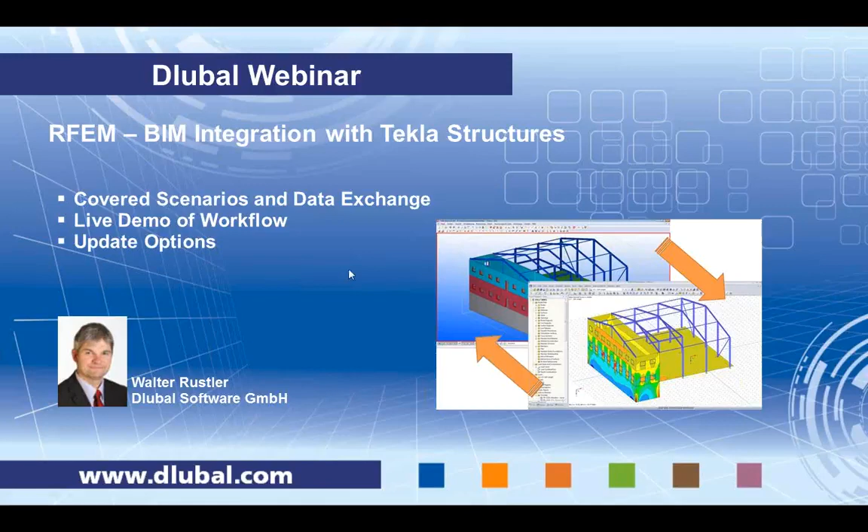So we are not limited to the generic definitions of a file-based interface, and we can pick, read and write all the properties of each object inside both applications, as long as they are supported by this API that both programs have. So in a sense, it gives us more specific options to import and export data and to directly connect the objects in both applications. It is a bidirectional interface with update options, and it works in a 32-bit and a 64-bit environment.

We can distinguish between a physical model and an analytical model, and it is important to know the difference. In general, when you work in an architectural program or a CAD application, you basically model the structure as you would build it later. When you do an analysis, you make a more simplified model that doesn't include all objects, like, for example, door frames, window frames, and other non-load carrying parts. Therefore, we have to make a difference between the physical and the analytical model.

And in general, there are some problems when you work with a physical model in a structural analysis program, because, for example, a beam might be cut off at the edge of a column, and therefore there is a gap between the center line of the column and the end of the beam. So in the analytical model, we have to overcome this gap and provide a connection, basically bring together all load-carrying parts in one structural wireframe model. And it's a mechanically correct model that includes 1D members like columns, beams, or bracings. It may include walls, slabs, or other surfaces.

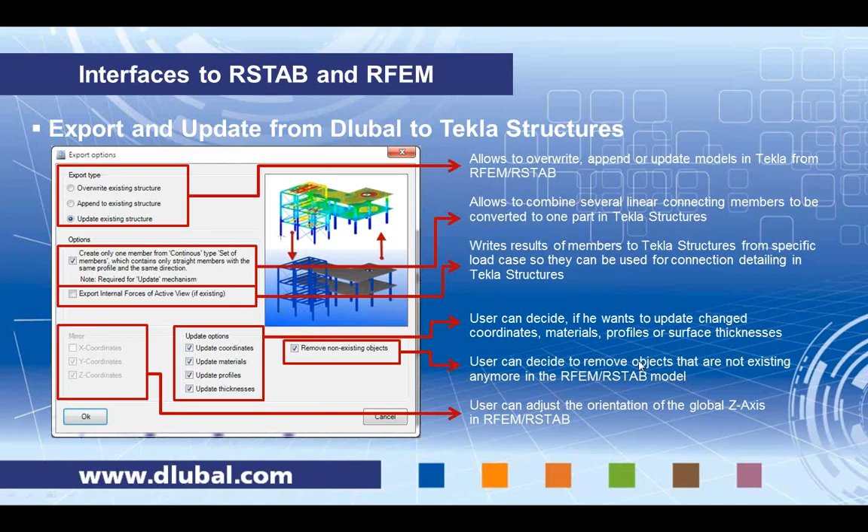Additionally, we transfer information like the node numbering of the Dlubal analytical nodes or the material or set of member numbering. So you can find the parts that you see in RFEM also in Tekla Structures. By inquiring the objects, you will find there, okay, member number 235 in Dlubal, this is what I have here now. And I can go to the Dlubal model and see, okay, where is member number 235?

All those user attributes can also be displayed on a drawing, for example. So it would be a good way to use it for an overview plan that displays the numbering of the structural objects maybe, or whatever you need it for. Anyway, we can update the Tekla model with grid lines, with information about the used materials, and also the node numbering, and additionally comments. That means I can write there, for example, this is a new beam, and then this comment will be also there as a user-defined attribute, which you can use then for filtering inside Tekla and so on.

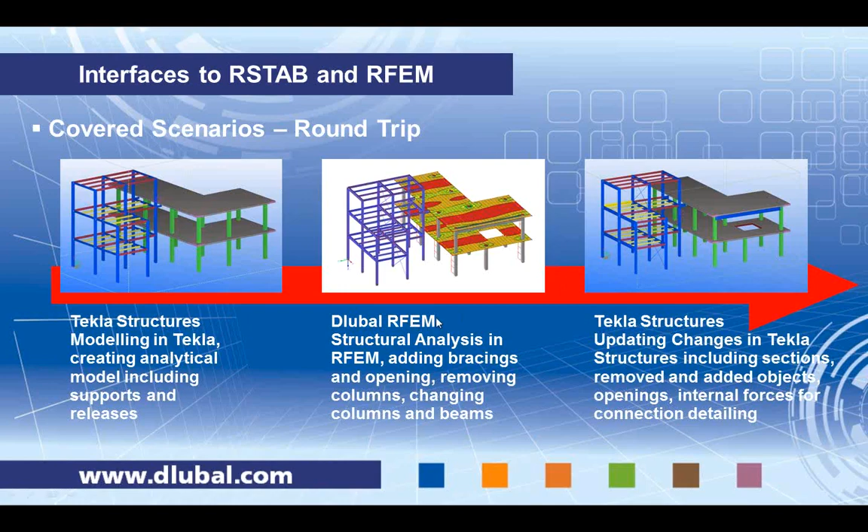Another option would be, and we will see this live in a few seconds, to start modeling inside RFEM. RFEM has great modeling capabilities as well, or you can retrieve a model from other applications, and we do the structural analysis, but there is no Tekla model. But somebody would like to have a Tekla model from what he has created inside RFEM. So we can just export it and create a Tekla Structures model from scratch.

The advantage of this is that, for example, you are a draftsman or a detailer, and you need to know which cross-section is used for which column, for which beam. Maybe if there's a simple model you understand and you can read it, but imagine there are 1,000 members and 500 different cross-sections, then it's not so easy to even know which cross-section is where. And if I'm a Tekla detailer, I might want to work inside Tekla, not so much inside the RFEM viewer. So I can use my well-known tool to get this information and to communicate it with somebody else, or to use it for detailing and modeling.

All in all, it is all about saving time, increasing quality and productivity, and this at the same time means also avoiding errors, and you have, I think, very well matching tools here with RFEM and Tekla Structures.

The next will be the live demonstration. We will do this 3D building here and import it from Tekla Structures. But before we do this major structure, I'd like to explain a little bit the options you have inside Tekla. I would like to point out that I'm not a Tekla expert, but I can show it a little bit.

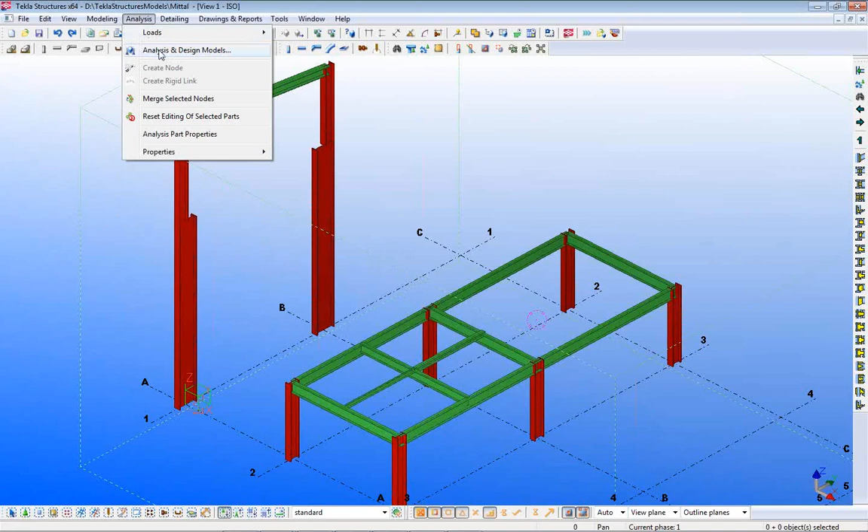We also have here a typical situation where there's a wide column and a narrow column, and then how to model this in the structural design. The special thing about Tekla is that it has an analysis and design option here. I start this, and I have prepared already a few models, and I can, for example, show when I select this model what happens here.

I get a display of the actual analytical beams, and we see here, for example, everything is modeled by the center lines of the columns. So the statical model is in the center line of the physical model, and because of this we have an offset, and this offset is closed by a rigid link, which is shown there in blue. This is done automatically by Tekla, more or less.

Then we have here the beam on top of the frame, and here the analytical line is in the center line of the top flange. It is important because you might want to have the correct column length or the maximum column length, and if I analyze it in the center of the beam, then I would lose maybe half of the depth of the beam and so on. And maybe if I have a wind load there, the wind load is not big enough. So how can I do this?

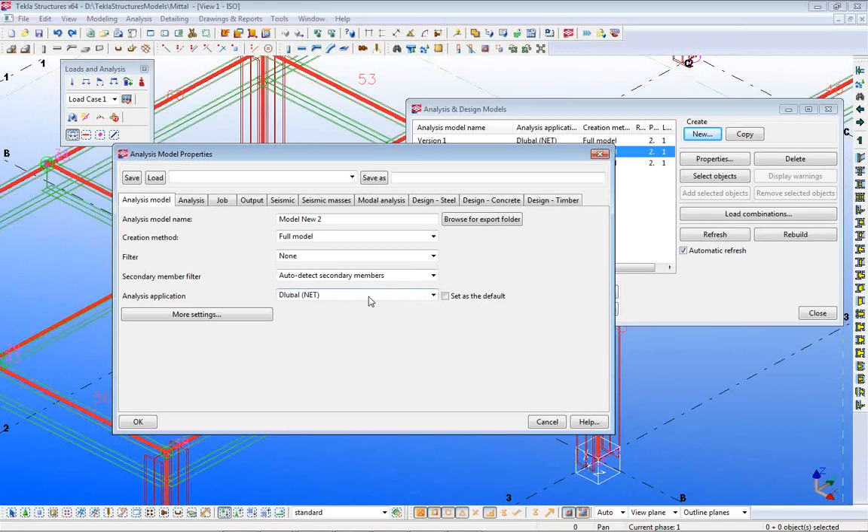Tekla is a very well-known, widely spread software that connects to different applications, and some of the tables or registers here are not used by us. We use basically what I'm showing you now. Here we have a Dlubal.net plugin, which is installed automatically when you install Dlubal after Tekla is installed. During the installation process, Dlubal looks for Tekla Structures. If it finds it, it will automatically install this plugin, and then you can select this interface. There might be other interfaces listed here in Tekla to use.

Then we have more settings, and in those settings we can set up the reference axis, member axis location, and this is an important thing. Now it's set up reference axis eccentricity by neutral axis. I can also use, for example, the neutral axis. If I do this and click OK, you see what happens. All the analytical members are moved to the center of the physical member. Because we have a different depth of the sections, the center lines do not meet in one point, and Tekla automatically creates so-called rigid links.

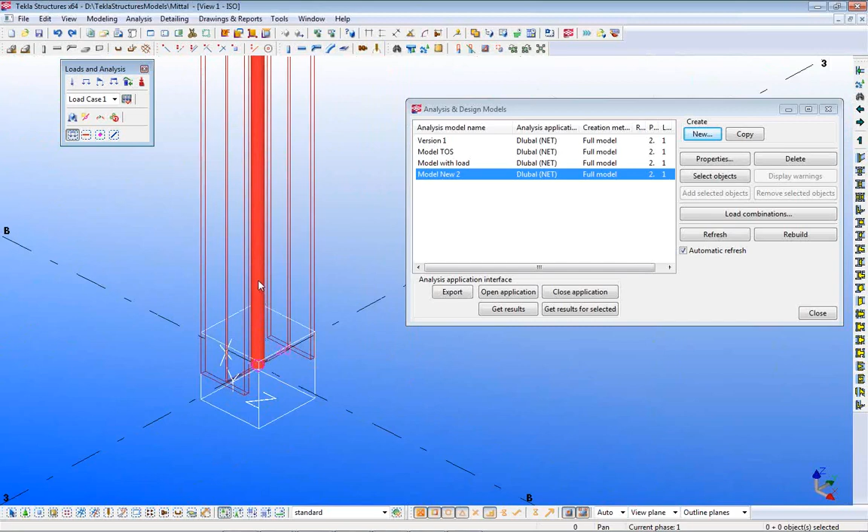Also inside Tekla we have, for example, support conditions symbolized by a white block here. If I edit the member here, okay, let me see, to edit it, it's possible typically to, maybe I have a filter which is not, yeah, I'll show this later to you. We see here that there are numbers for beams and for nodes. We see the supports. We see how the physical model changes.

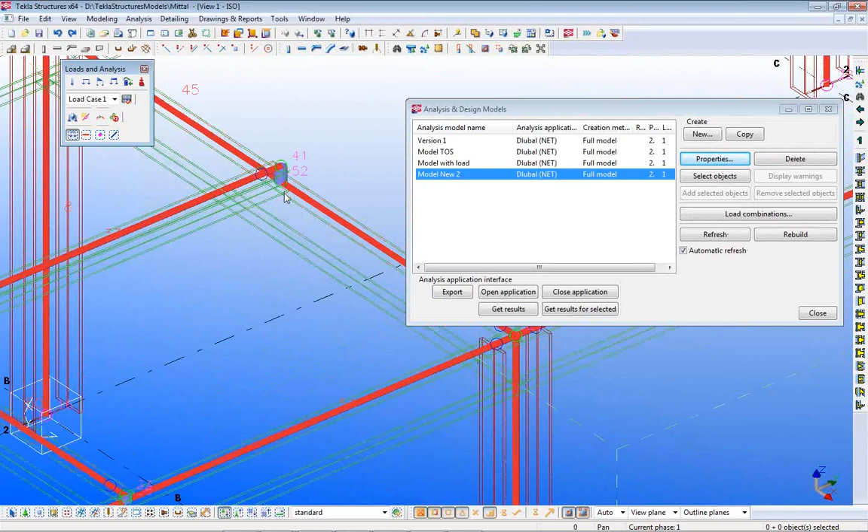If I change it again, for example, not to neutral axis but to reference axis, it is rebuilt automatically, and you see here other placement of the center lines. Okay. I didn't activate my mouse arrow here.

So let's say I want to change something here, not globally but locally. For example, I would like to say this analytical object should not be on the reference line. I can change it, and I can say position, not reference axis, but maybe neutral axis. And I modify it, and axis, reference axis, let's see what happens.

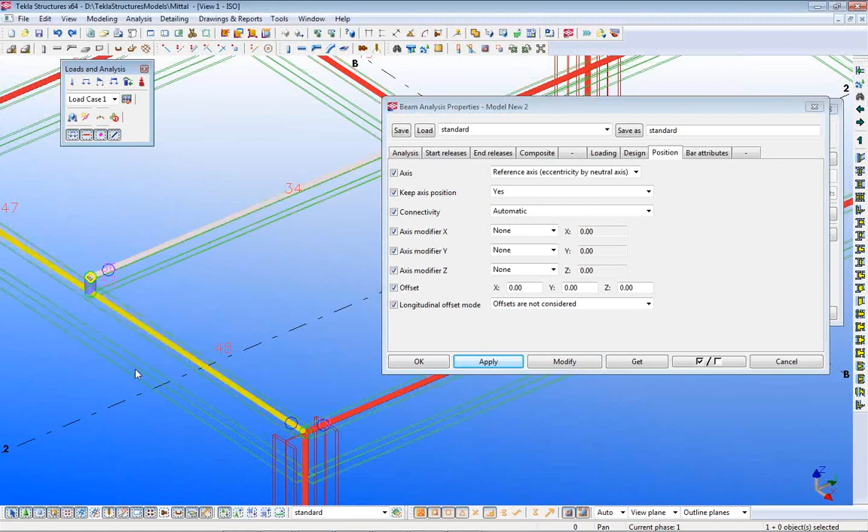I had this problem also yesterday during a demo, and then it worked, but never mind. You can do it also individually. That means you can do it globally, so all the offsets are changed, or you can do it member by member. Let's take a look at the support conditions.

If I click on the column, for example, you see here start release is a support, or it can be a pinned support, or it can be only connected, or you can have also free definitions. Then you can enter here some spring constants and so on. Or the end release is only connected. So on the top here we have no connections. Or the same thing here for the beam.

I click on it and I say start release is connected. We see here with a release, and I see here a circle. If I do not want to have the release and say I want to have it fixed, I modify it, and then it's changed. So it is possible to individually adjust this analytical model.

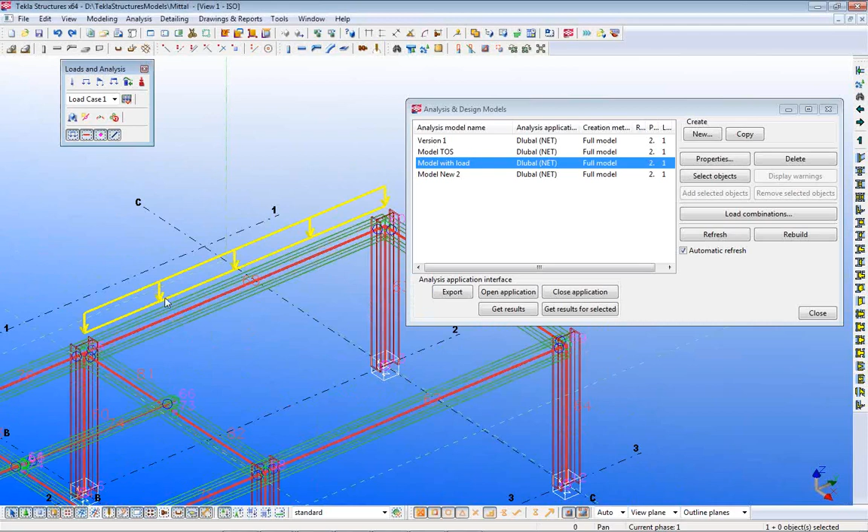I open another model here. We see, for example, there are also loads. I can display the loads basically here. You see here there's a load inside Tekla Structures where we can apply the magnitude of the load, and this is also possible to implement inside Tekla. Okay.

Maybe I try to import this model quickly into RFEM. I open RFEM here. In RFEM, I open the direct import from Tekla Structures, and I get my import option that we just saw in the slide. I want to import the analytical model. I import load cases, the rigid links we see, click on OK, and now I have a selection of the various analytical models I have inside Tekla Structures.

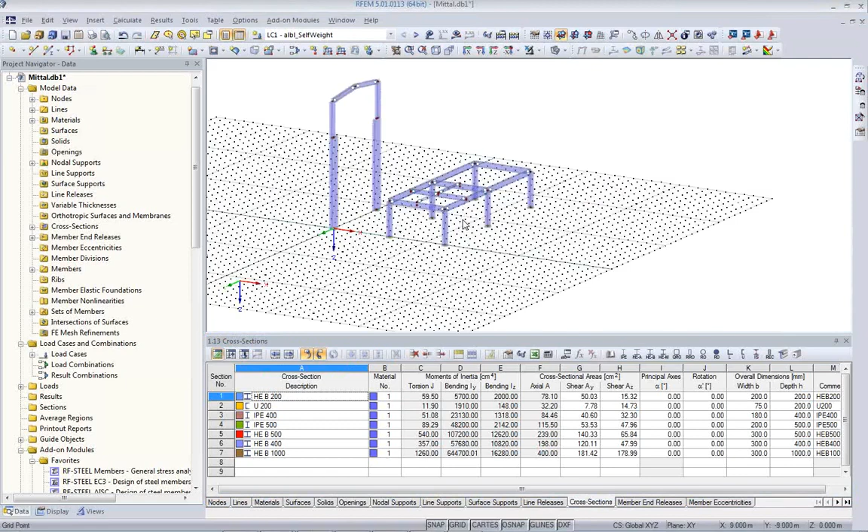So the same models that I have here are given to me as a choice inside the interface. So now I use the model with the load, which I'm just displaying here. I click OK, and there is a little bit of a protocol that goes through, and then I have here my structure inside RFEM. We also see the load is here.

And if I go to the wireframe display, we see here also we have rigid links, we have the offsets that come from the Tekla Structures model. We see here also the support conditions are here that we can use and so on, and also the columns have this offset here. So this is how you can set up your model inside Tekla Structures and change it and already prepare the structural model inside Tekla Structures.

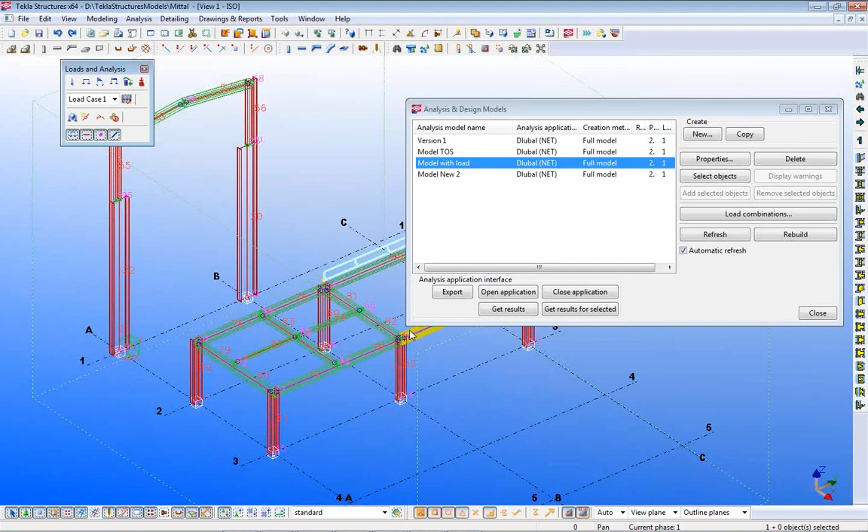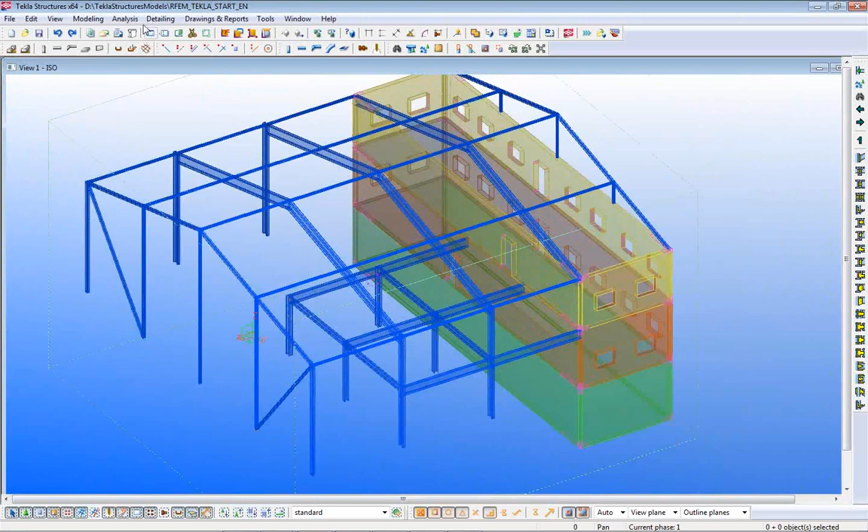Now I'll use the more complex model that I have prepared, and I open this inside Tekla Structures. This model includes not only beams but also slabs and walls, including openings, and I prepared several models inside already. You see here it's a hall including a second level here, and there is a basement including some slabs here with openings, windows, and so on. Inside this model I have prepared already the analytical design model.

Actually I've prepared several models. I have prepared, for example, the concrete part. So I only get the concrete part here. For example, I can quickly import it here. Concrete, and import here the analytical model. Okay, I don't want to load this time, and say here concrete part.

So even though I have a 3D model in Tekla Structures, I can load only part of this model, and I can say, okay, now I don't want even the 3D concrete model. I want to have maybe only one floor or one slab in the first level. So I have just one slab here that I can work with. So I can do a simplified analysis. And also the same way I can say I want to have only one end wall, and I do like a 2D analysis of this end wall here, for example.

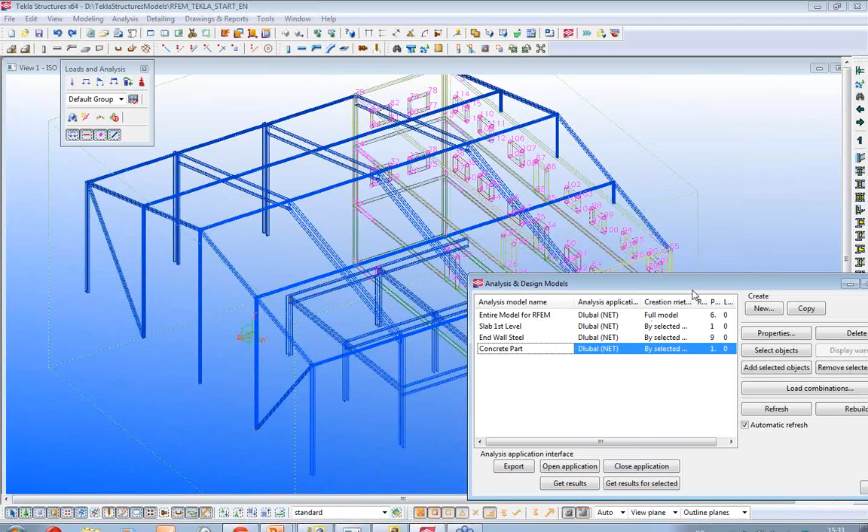If you want to, you can import only one beam if you want to. Please note, here's two analytical members. Inside Tekla we have one part. When I update it later, it will be staying one part inside Tekla. Okay, but actually I want to have the entire model. Maybe I explain a little bit about the entire model that I have done in Tekla Structures.

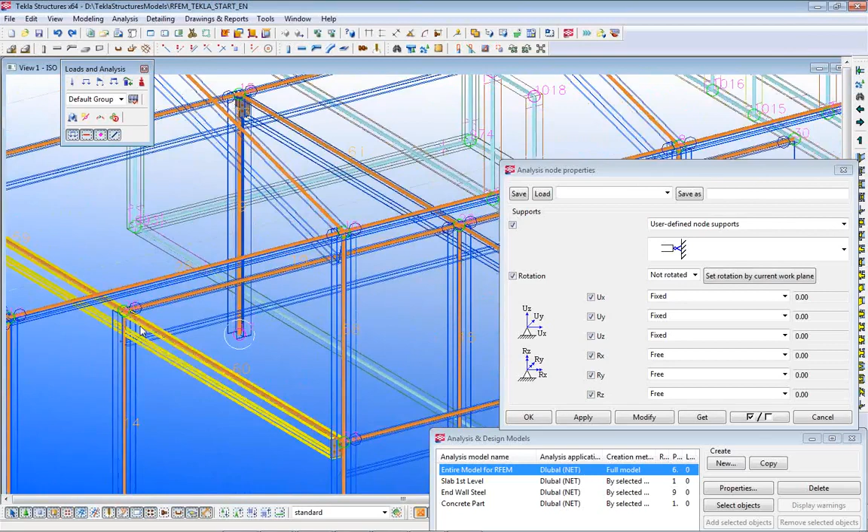Here we have support conditions, which are pin support. We have here set up releases already at the ending of some beams here. We have openings. I've made the model in such a way, for example, that those beams here are modeled as top of steel, and this analytical model lies in the center of the top flange. So it's one level. And important is when we update the sections later, that those sections, even if they change in the section, they should stay top of steel.

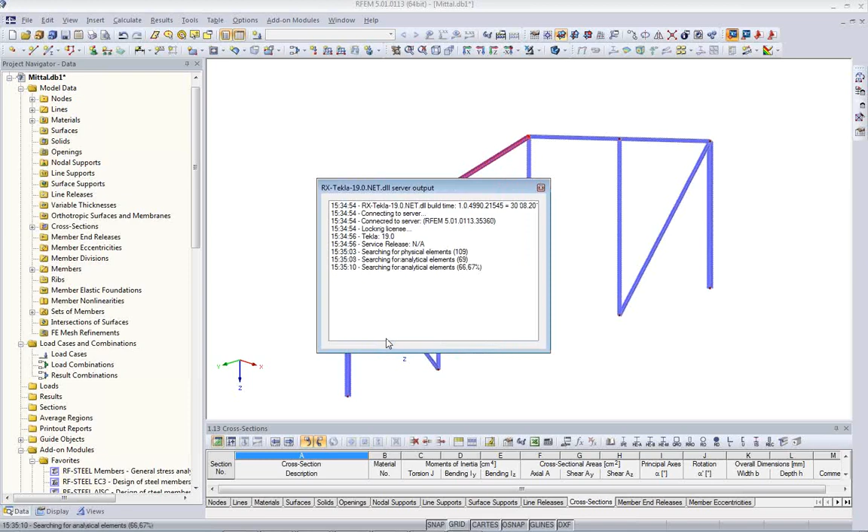Okay, also here the walls are modeled as center lines, and the slabs as well. So I'm closing the model here and stay with the physical model view, and I start inside RFEM and I import the analytical model, including rigid links, which I don't have at the moment, and I click OK. So now I choose the entire model, click OK, and we are importing the entire structure.

We see here we have the supports, we have a variety of releases here, we have the openings. We see on the display that we have already cross sections imported, and when I look at the table of cross sections, I see they are all converted from the Tekla designation, which is missing the blank between the IPE and 550, but Dlubal has a blank in there. So we internally map all these cross sections.

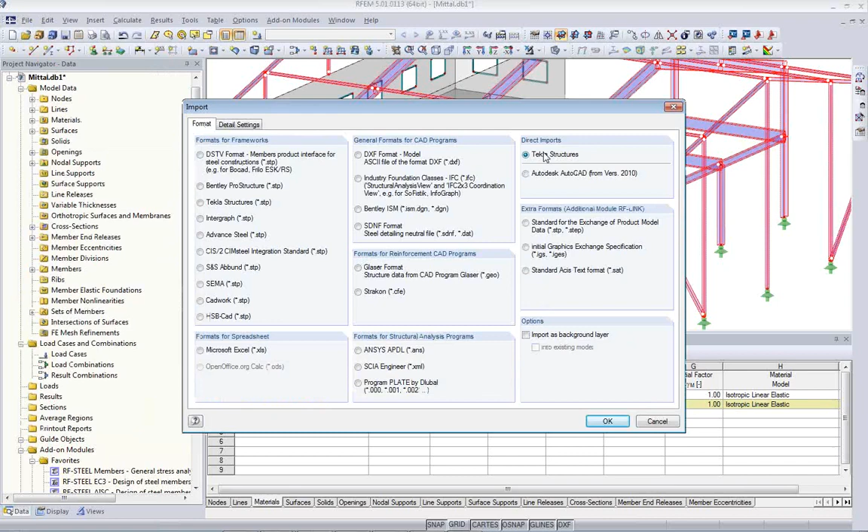Also, the materials are already set up according to Eurocode, and in Tekla the material name is much more simple. We include the code. How does this happen? When we import, we have a variety of files, of course. We use direct import from Tekla Structures, and in the detailed settings, I have the option to set up a conversion file, or I can edit this conversion file.

And here, I set up which name of the material or cross-section should be converted to which name inside Dlubal Software. So I have the option to import, export it from Excel, and I can set it up in my company as I like it for my typical materials I use. And once I have adjusted it, it will be valid all the time. The same is, for example, for cross sections.

You can use this very well if you have non-standard sections that are coming from different vendors. Everybody has his own designation, and for us it is basically impossible to know all the names that exist in the world. So therefore we match the Tekla name and the Dlubal name, and can now translate those cross sections automatically. Okay.

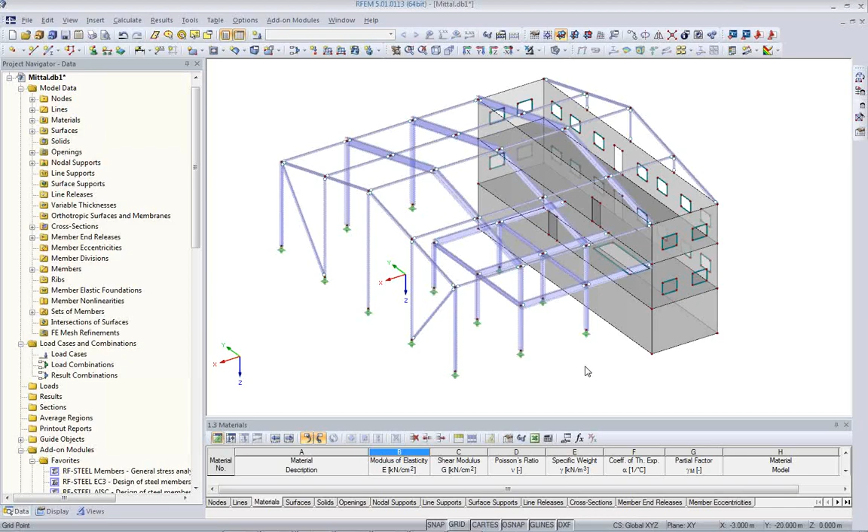Now we'll do a brief structural analysis with this model here, a 3D analysis. We'll change some cross sections, we'll add some members, we'll do some concrete design. It's basically a totally independent model from Tekla. I can do whatever I want with it. It's not some special model that can only be used in conjunction with Tekla. So it's totally independent. First of all, I would like to know if it's really working, if it's well connected and done correctly. So I do a first run and do a brief analysis.

First of all, I need a support on this foundation slab here, and I enter this support inside RFEM. I select a non-movable support as a first idea of this support condition, and edit the surface and add it there automatically. Next, I need a load case to see how the deformations are, or if it calculates and if some parts are loose. So I do this simply by creating a new load case.

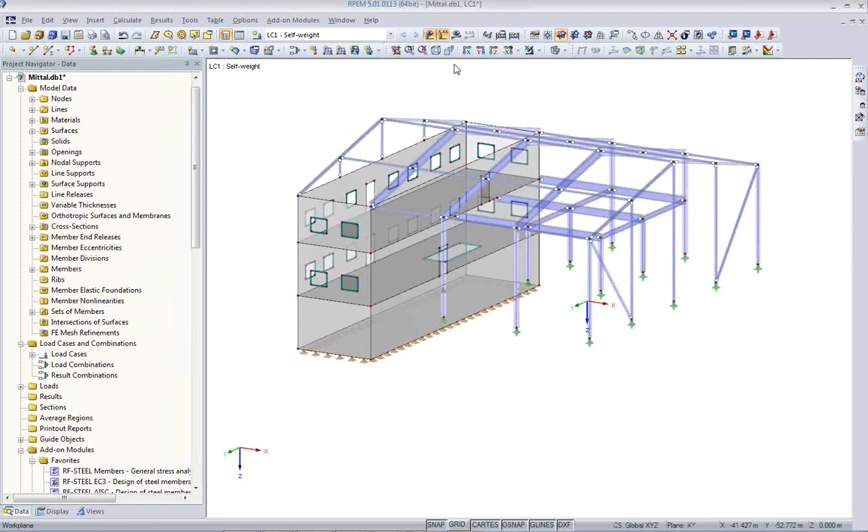It's called maybe self-weight of the structure. It will be done according to first order with a default mesh of 50 centimeters for the slabs, and we'll do an analysis. And it seems to be working. I have here now a moment diagram which looks reasonable. I have here maybe internal forces of the slabs which look pretty okay.

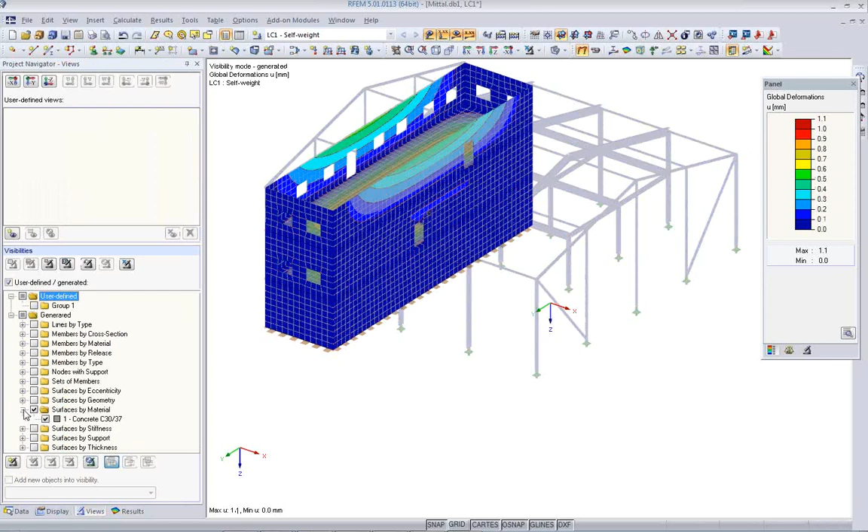I can maybe show also the deflection, maybe not now for the concrete, which is rather massive, it is almost zero, but maybe I only show the steel parts, not surfaces by material, but members by material. So we can see here all the deformation lines of the members. I can animate them, and this way I can usually find if there are some loose parts, and it looks all good.

Also, the support reactions should be more or less symmetric, which is here at the corner columns, and there's a little bit of difference because here we have this floor structure in here, but it looks quite okay. So my model is of good quality, and I can continue doing the design process.

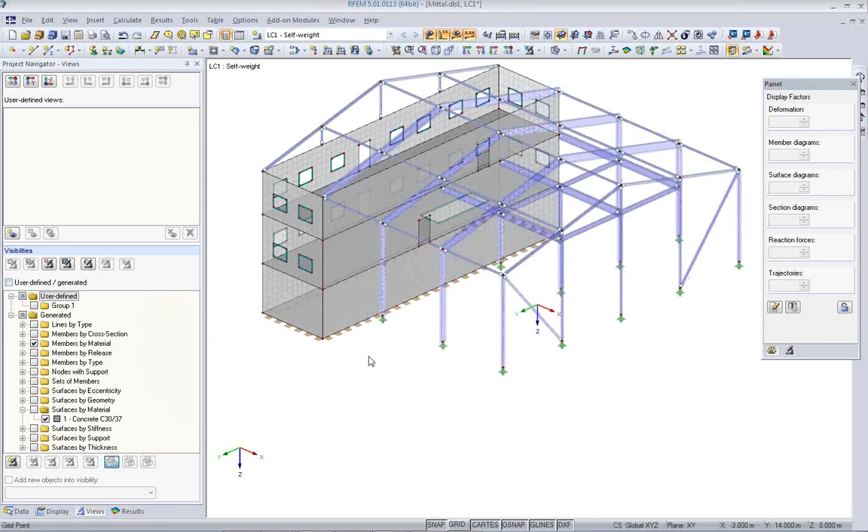First of all, maybe I check another thing from the structural point of view. I need some bracings here in the roof. Typically we have some bracings here. The first level of the grid is supported horizontally by the concrete part here, but the roof structure maybe is a little bit unstable, and I would like to have a bracing here.

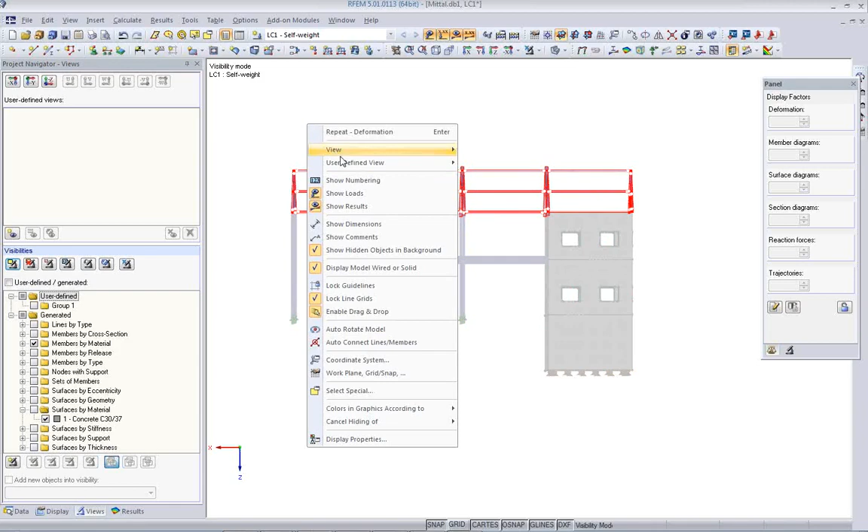Before I do this, maybe I prepare some typical views of the structure, and I select the roof, and I create a new visibility from this roof structure like this, and I say, okay, this is what I like to save, and I create a new user-defined view. I call it roof.

Next, I like to do similar things, for example, with the floor here and the additional slab. Maybe I can select it like this and say, show me only the selected parts. This is another view I'd like to save, and I call it floors.

When I go to the default RFEM view, it's displayed this way, but Tekla always uses this kind of view. If I go back to Tekla, this is their default view. So in order to avoid confusion, I'd like to save this view as well, and I name it As Tekla. From now on, if I need a different selection of my model, I click here and I have everything I want.

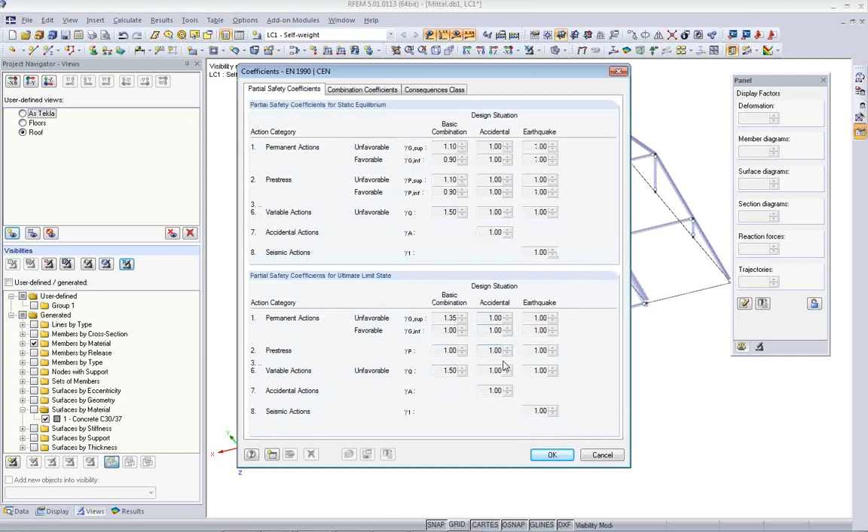Okay, let's start with the loading. When I go to the general data of the model, I can set up the load cases and combinations according to a certain code. I'll use Eurocode for this. I have here the various national annexes. Because we have international audience today, I use the general Eurocode settings, which are available at the detail settings, and we have access to partial safety factors, combination factors, and consequence classes.

Once I do this, I can also create combinations automatically. We stay with a 3D model. The advantage from now on is all the loads and load cases I enter are classified according to this code for snow, wind, and so on, and the software knows automatically which combinations to create and which combination factors to use. I can do this most comfortably in the tables, which I can display or hide, and next to the model data there is the load cases and combination data.

As you've seen, there is an automatic combination done, but as soon as I change the load case setting, and it doesn't really make sense to have combinations with just one load case, it will update or delete these combinations that were done automatically before.

I create next to the self-weight a second load case called snow, and I have access to all the action categories for Eurocode. I have wind as a next load case, and another one isn't here, so I type it in: live load. Then, because it could be anything written there, I have to make sure I choose the right category, and this should be an imposed category B for office areas. Okay, I have four load cases, which should be enough for this demo.

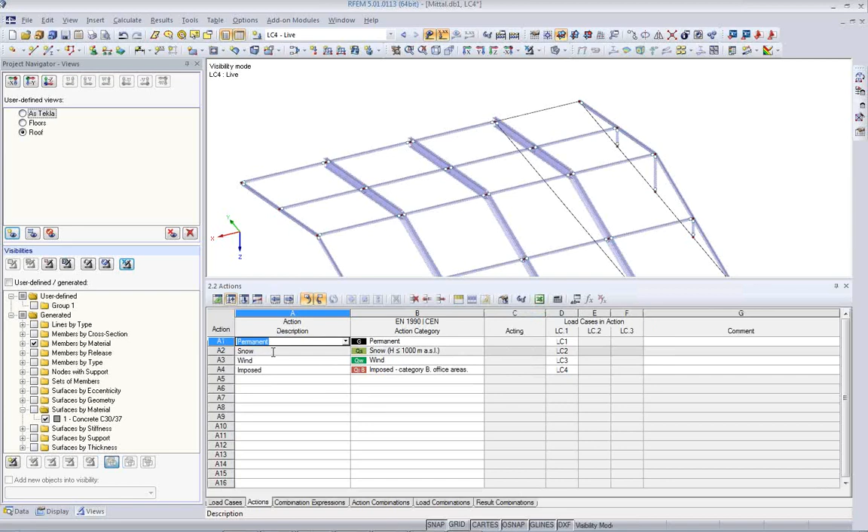I have actions, which is a first summary of all the wind load cases, all the snow load cases. They are summed up in actions, and then we combine the actions. Typically we have an ultimate limit state combination and a characteristic, frequent, or quasi-permanent combination. I want to do a preliminary design, so I'm only interested in the design ultimate limit state combination.

So you don't have to calculate everything, but you have a selection here of what you really want to calculate, so you don't turn off your brain. You control the software, not the other way around, and you also see exactly what the software is actually doing.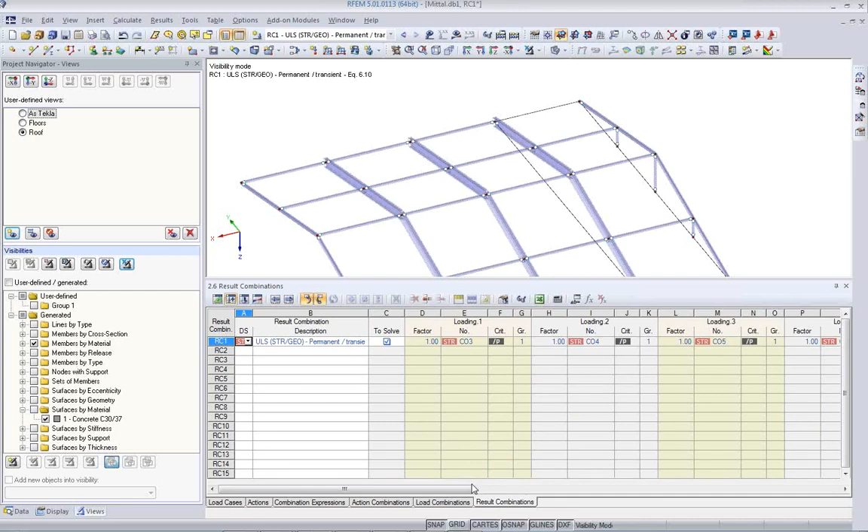Okay, then from these 13 or whatever combinations, I can create a result combination, which is the envelope of all the calculated combinations before. So I get a max-min summary of all the combinations I have to analyze. Okay, this is the combination part.

Now we talk about the actual loads. Self-weight is already here as the self-weight of the structure, but I need to add the actual loads now. So I go to the wireframe view and add a roof load quickly. It's a surface load assigned to load case 1, and the magnitude in this case is 0.5 kilonewton per square meter, in global direction but related to the true area.

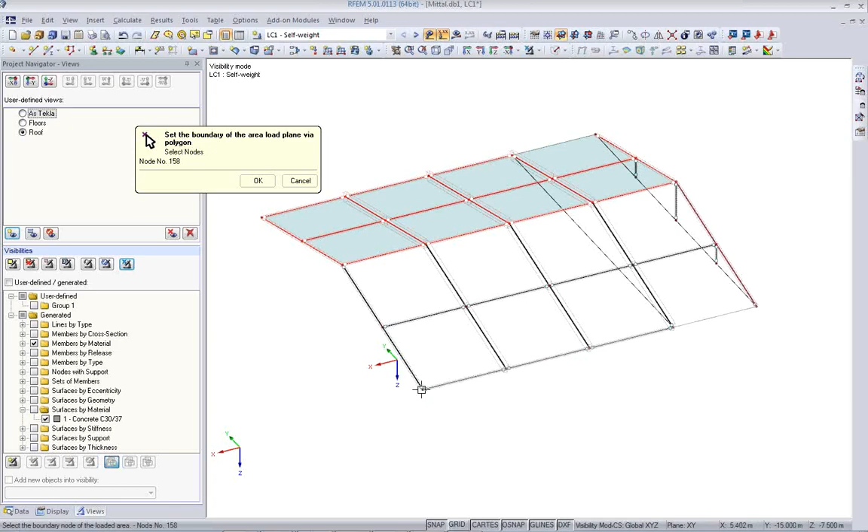So I pick my boundary nodes of the surface, and I can continue doing this for multiple surfaces. On OK, I return to the dialog, and I can select parallel members that should not be loaded, so only the red members will now be loaded. I click OK and OK again, and I get a summary and some statistics, and I see here my first area load.

The next load, our self-weight load, will also have to be on the floors. That's why I prepared this view. I create another area load on the grid here and select the individual corner nodes, and decide that the distribution of the loading should be on the cross beams. And two more surface loads on the slabs, 0.5 here and here.

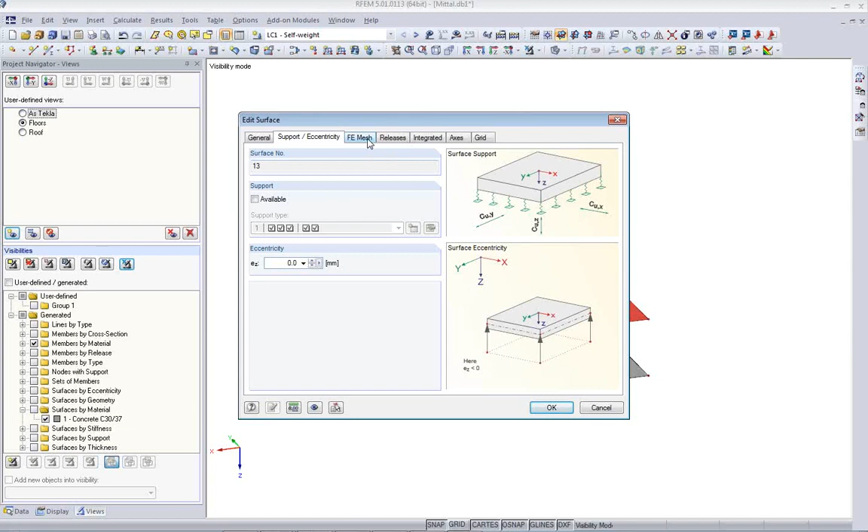While working with the slabs, I remember I forgot something. Those slabs are now rigidly joined with the walls, but I don't want this. So I double-click the surface, go to releases, and add a linear release that sets off all the spring constants for moments on all the edge lines of the surface. Then I get displayed a linear release on the edge of the surface.

I do the same thing with this second surface, create a new release, also the same type, so there should be no moments at the edge in the wall. Here, because it does this automatically on the opening, I have no wall, so it doesn't make sense to have the release there. I can just select it and delete it.

Now I think I have everything regarding the model. We've looked at the self-weight load cases, and we continue with snow.

Snow is something for the roof, so let's quickly have the roof here. I have a tool called snow load on duopitch roof, and I can use the Eurocode here with national annexes. The ground snow load should be 1 kilonewton per square meter. And I pick now the boundary of this duopitch roof.

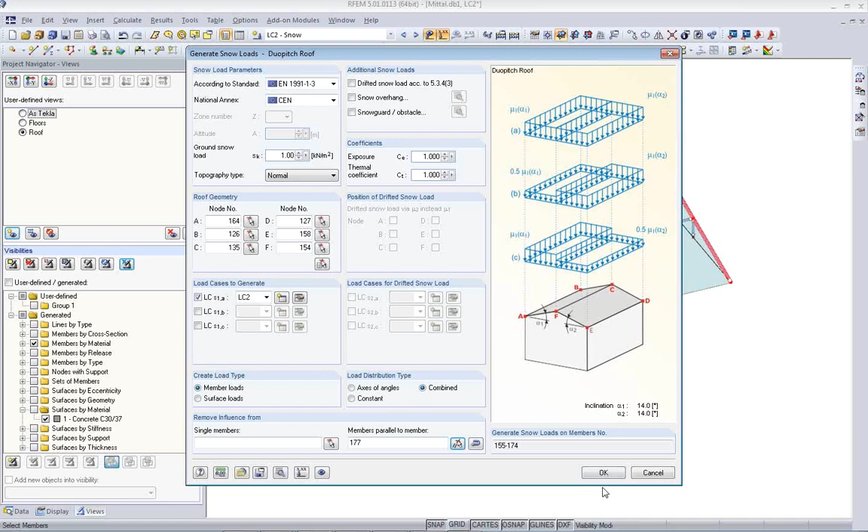There are 6 nodes I have to pick. It should go in load case 2, which is snow. It automatically filters it and remembers it. Then I say again, only on the main beams I want to have this loading. I get a summary and my final snow load applied.

Next is the wind load. Wind is on the entire structure. I go to wind here, and I would like to have some wind in the -y direction. So I add a wind load as force in global y direction, -0.5, on this surface and on this surface.

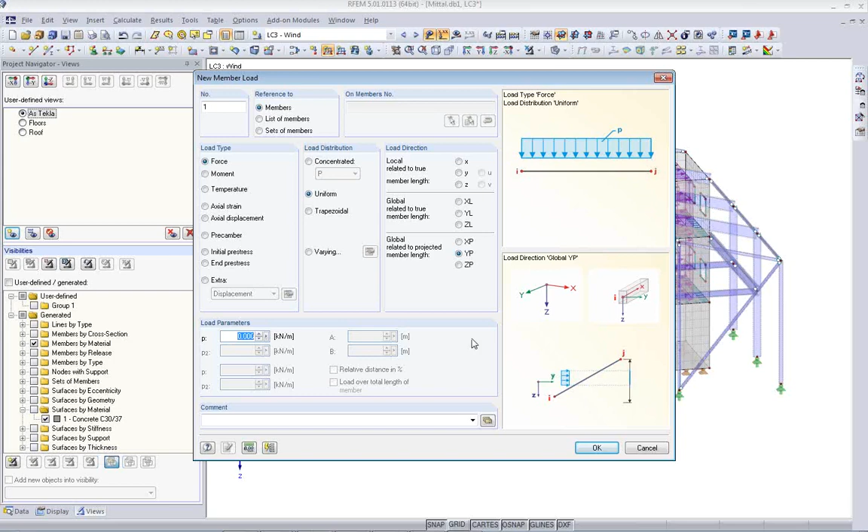On the opposite side, I have a little bit less. I create here again a smaller surface load. I also need some loads for the columns, member loads in the global y direction. It should actually, in the projection, if it's not vertical, be -2.4 as a member length, as the member load.

On the edge, there should be some lower value, maybe only half. Then here, on the opposite side, again the same thing, but -1.5, a little bit less for the center columns, and -0.75 for the edge columns.

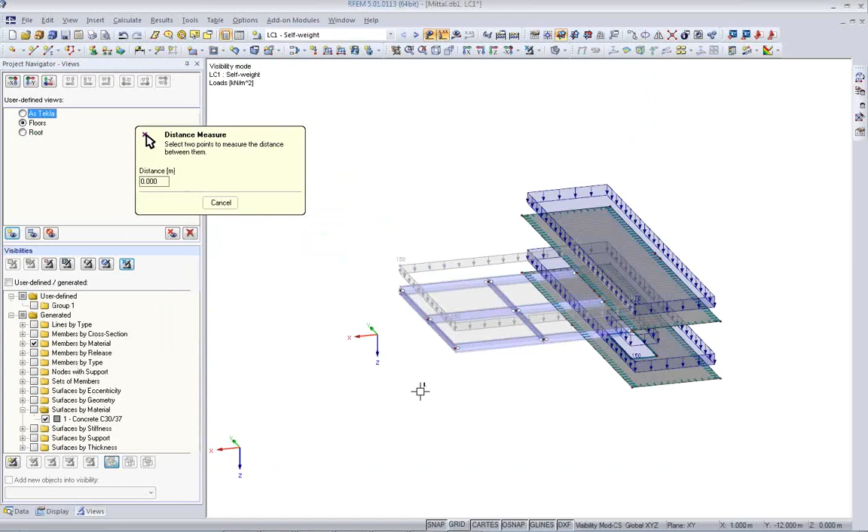Additionally, I have a wind load on the roof, and I use the generate wind load on duopitch roof function. Again, according to Eurocode, I need the height of the structure, which I can grab from the structure, and I need to select the roof points.

One more wind load. Okay, I have the height. Everything is fine. Now it's important to understand where the wind blows on the structure, and you see here A, B, C, D, and I use this order to select my nodes as well.

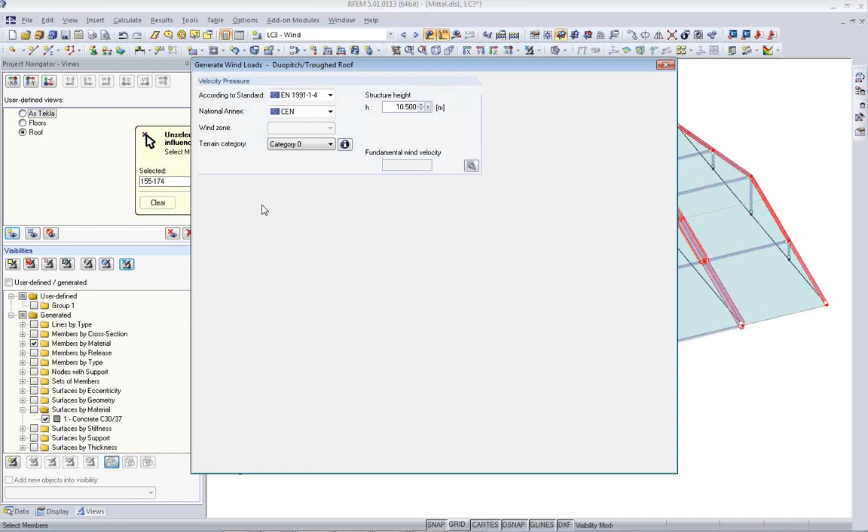The wind load should be analyzed going to load case number 3, and I only want it on the main beams as well. You can see in the background also the impact categories or areas, G, F, H, J, I, as in the code. And it creates my uplifting wind load.

Last but not least, we have a live load on the floors, which is basically simple. We can create another surface area. It remembers the last input, so I only need to add the actual live load. It's updated here in load case 4, and the same live load, 3.5 as global, in the direction on the slabs.

It is more or less complete now. Of course, I understand that wind loading can be much more complex. We may need some load mode working off the end walls here and so on. That's extra work that needs to be done.

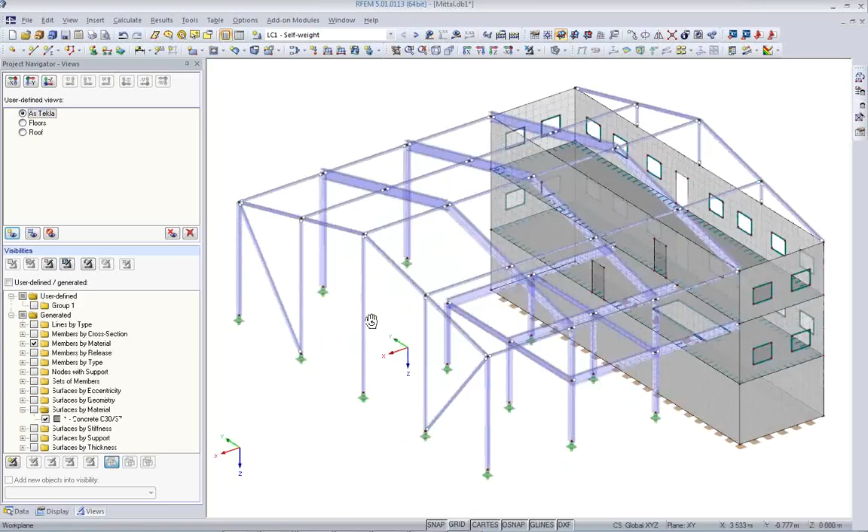We have for typical structures wind load generators as we've seen for the roof, but for our demonstration here it should be enough, and we will now run the analysis of this structure.

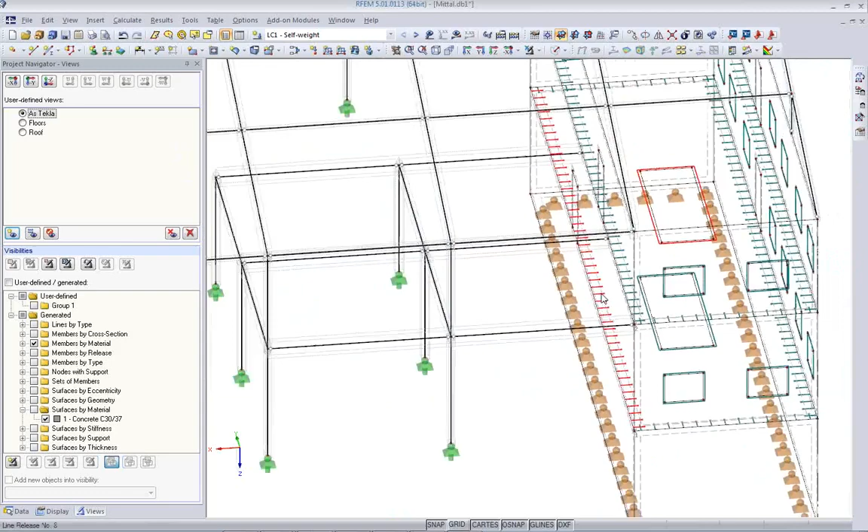Before running the analysis, I remember one more thing. I got a call from the architect, and he says he wants the same opening that's on the first floor also on the second floor, because otherwise there's no way to get up there. So I need to quickly copy this opening: I select it, move-copy it, make one copy, and copy it from here to here. Now there's an opening also on the second level.

Now we run the analysis, or go to the design. Design is done by the additional module Steel EC3. I'll briefly go through this module - there are other webinars that already cover it, as well as another seminar covering the concrete module, which I'll show in a few seconds. I won't explain all the details now, because we also want to exchange data with Tekla.

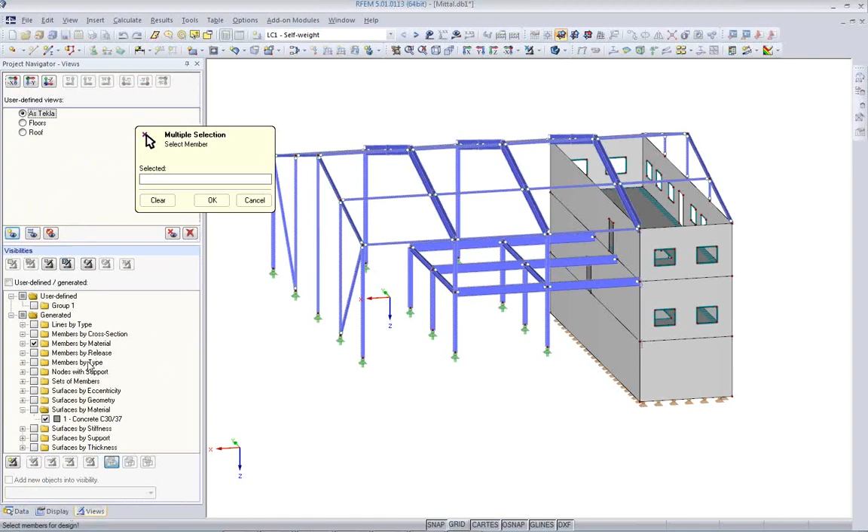Now we go to the RF-Steel EC3 module to optimize some of those sections. We have Eurocode design, with national annexes, and I select a series of members I'd like to design. Here I'll use the Filter tool again to select, for example, members by material, so I hide all the concrete stuff which has nothing to do with EC3.

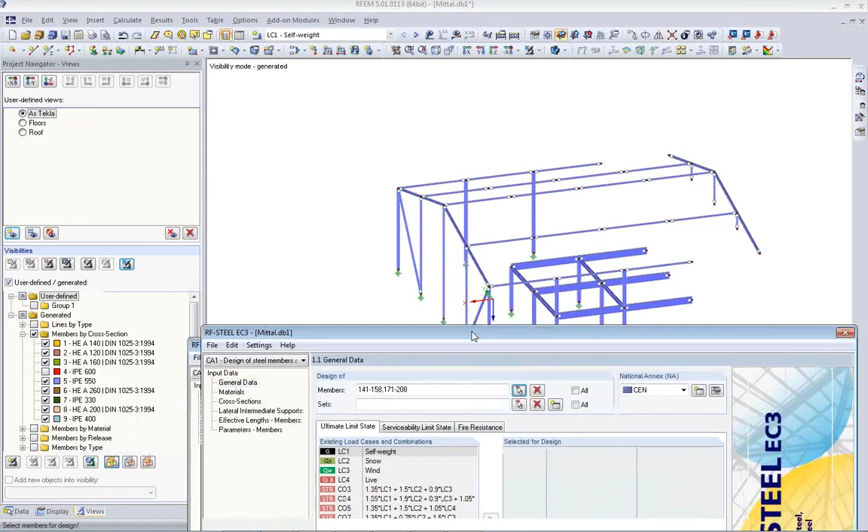I can also do similar things like members by cross-section. If I open this filter, I can say please do not show certain members - I don't want to see those. The reason is those main girders I will design with a different procedure, but the rest will be done as members, since all those members have design lengths equal to member lengths, with the exception maybe of the columns, but we'll neglect that in this case.

I select for design the ultimate limit state combination I pointed out before, and now I'll also select the set of members - I select those main beams here, which are 6 main girders. The design length of these main girders is the entire length from the wall to the pitch of the roof.

It has a local support which is held by the frame, which I forgot to enter - I see it's supported by the bracing, which I forgot to enter, in the center. So the buckling length in the weak direction of the cross section is smaller.

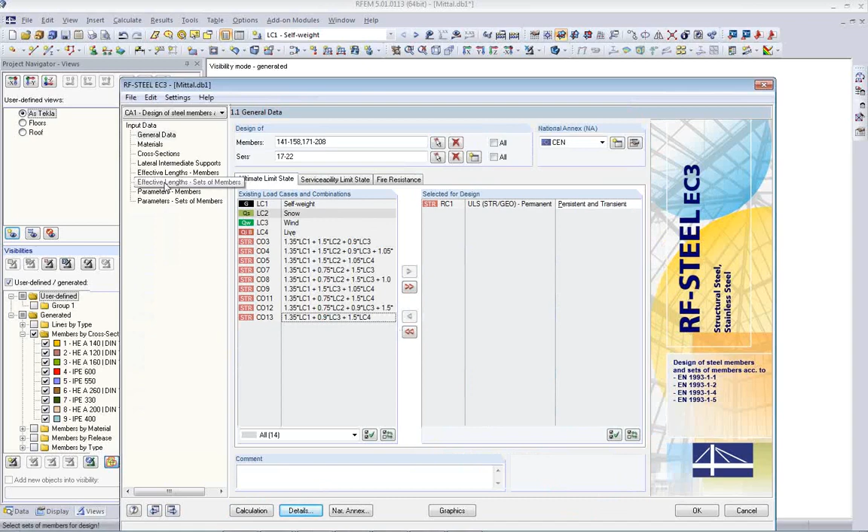I can select now in the stability design that I want to use the equivalent member method, or I could use the general method, but the equivalent member method is simpler in this case and is the more general option typically used, which is why I selected it here. We have the materials, and the cross sections imported from the structure.

We have lateral intermediate supports for members, and effective member lengths, including effective member lengths for set of members. Here I select the factor 0.5, so about the local axis z, which you can see here, the buckling length will be only half of the actual member length.

With the use of set of members, I can handle this very comfortably. Otherwise, I have the option to take into account rotational restraints from a steel deck, for example, or shear action from a steel panel, which of course increases the stability of those beams.

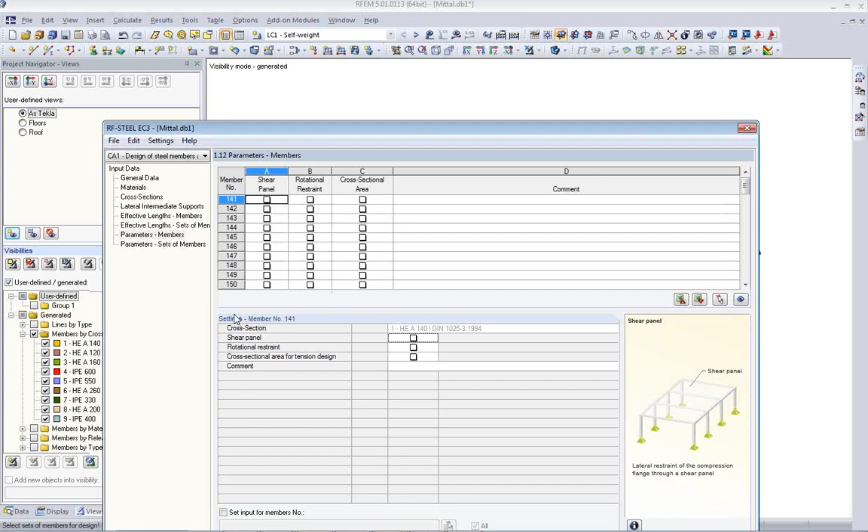Before I run the analysis, I go back to enter the bracing which I forgot. Let's go back to the roof. I have a tool that quickly allows me to add bracings - tension only members. I create a new cross section, which I can just enter here.

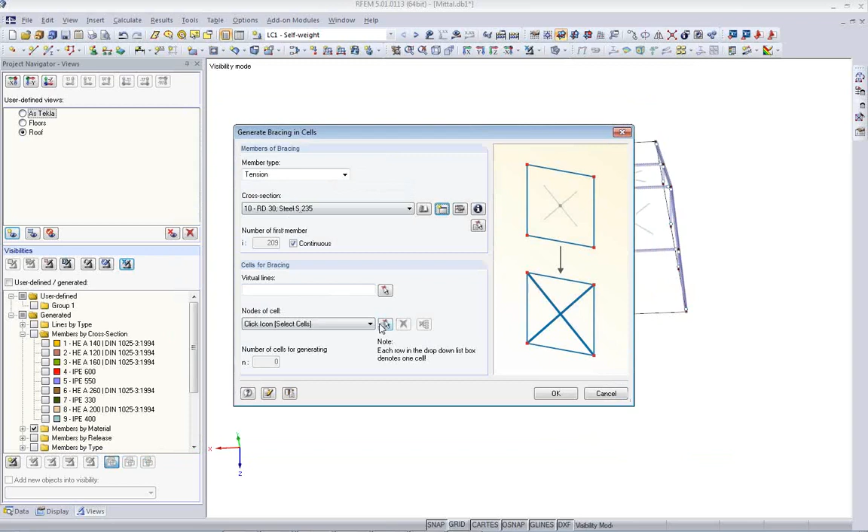I select steel as the material. You can either go to the library to pick it, or enter it manually - if you know the name, it will automatically read it from the library. It's tension only members, and now I can just select the bracing crosses here, which the software finds automatically as enclosed cells and gives me a symbol I can select. Otherwise I'd have to manually enter all those beams, which is more complicated. Quickly I've created my bracing here.

Here we go, we have the entire model now. Maybe we should talk about concrete as well - let's design that too right away. Concrete surfaces.

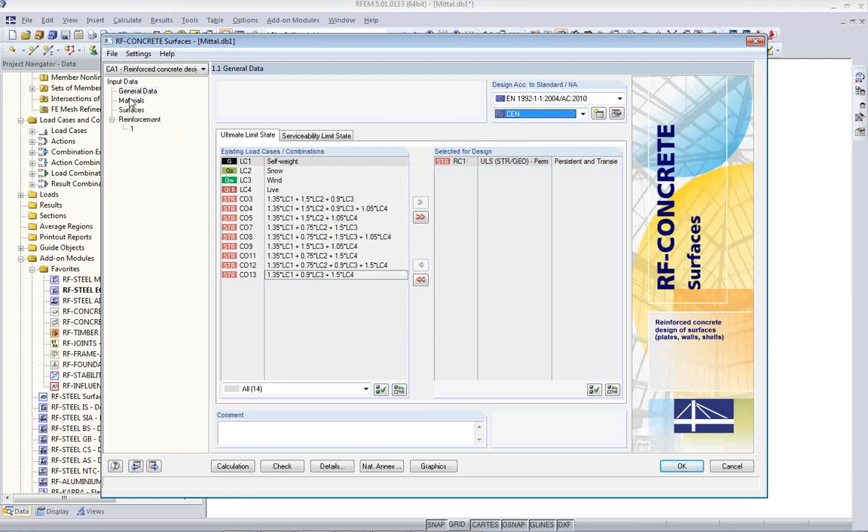We go to the surface module, and we also want to design the result combination 1 according to Eurocode with the national annexes for the general settings. I have the materials as well here, the surfaces, and the reinforcement settings. I don't want to investigate all surfaces. I only want to have my 2 slabs.

Okay, and here I need to talk about the concrete cover. I want to do it according to standard. I just select the exposure class. Now let's stay with XC1, and I get automatically the required concrete cover. I can do a provided reinforcement that I decide to enter there anyway, on top and bottom to avoid cracks.

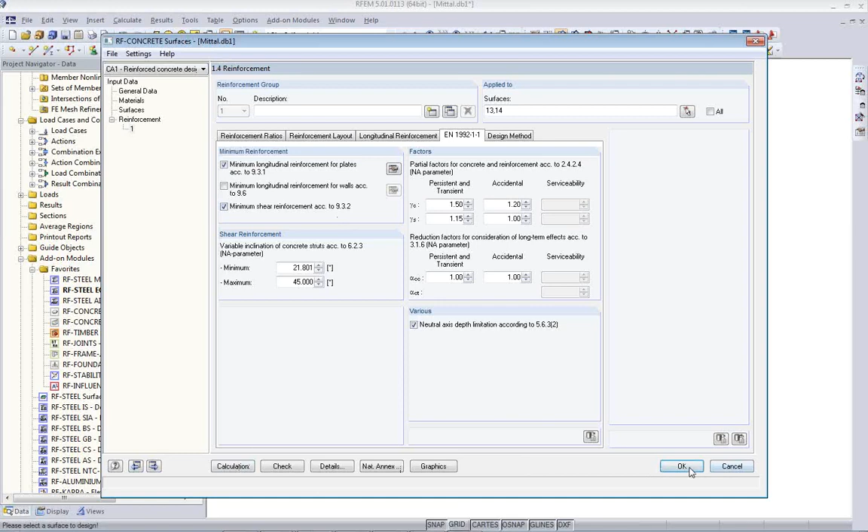There's also an option to analyze the crack width and so on, but for my preliminary design, I say I want to have this wire fabric here, and I like to check the minimum longitudinal reinforcement and so on. So this is it for my settings, and I think now I can just calculate everything. Calculate all.

Now RFEM will calculate all the existing load cases that I have selected for calculation, and I hope everything is going well. I haven't checked it with the real loads, only with the self-weight loads, and it will take now a little bit. It's a nonlinear analysis. I can set up that combinations are done linear or nonlinear. Typically it's linear for load cases and nonlinear second order or P-delta for combinations.

We use now a nonlinear analysis, which is taking into account the additional moments from deformations. So equilibrium on deformed structure is maybe the important sentence to say here. Okay, after a little bit we will get hopefully the results. Combination 12, and I think we have 13 all in all. So there are several iterations because we have failing members like the bracings, and also we have the second order iterations anyway. Okay, now we go to the concrete and the steel design, and we get finally some results.

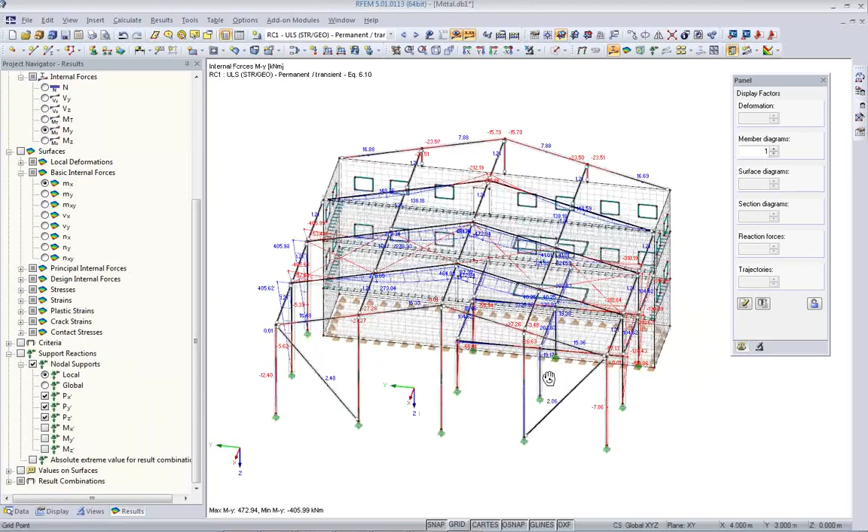Okay, let's take a look at the results maybe for the internal forces. Result combination 1. I go to the wireframe display and wire display, and we see here bending moments, for example. From ultimate limit state combination, we can set up here axial forces, bending moments, strong axis, weak axis.

Looking at the weak axis bending moment, I see here, I don't like to have that. Maybe there's something wrong with my orientation. Yes, I have a frame here, it's a moment connection here, and it goes into the weak axis of this column, which is not good for design. So probably I have to change this. I remember this and do this then later.

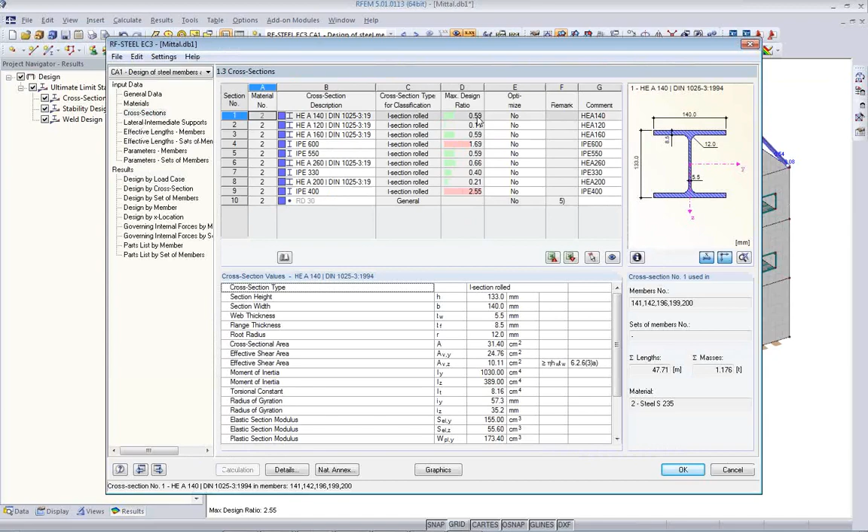Let's see what we get on stresses. Steel EC3, ultimate limit state, design ratio is 2.55. Let's see which cross sections are a problem. I go to the cross section table and see here, okay, there's a problem, not a problem here, not a problem here. These seem to be okay, but these main girders are a problem. Then we have the cross beams here, which are pretty okay.

And I'm missing actually, now here they are. These are the main columns here, which are not so good. We have IPE 400 here and it's no good. So something needs to be done. Probably it would be a good idea to have here an additional column and also maybe to support these main girders here. Some design considerations that maybe are done while the structural engineer is doing his job.

Also, maybe I'd like to optimize those cross sections, and I optimize them from current row. This means I optimize, I don't change the type of section. I use an IPE, for example, and I stick with an IPE here. And this I want to change anyway, so I leave it. Those main girders maybe can be smaller, so please pick another one.

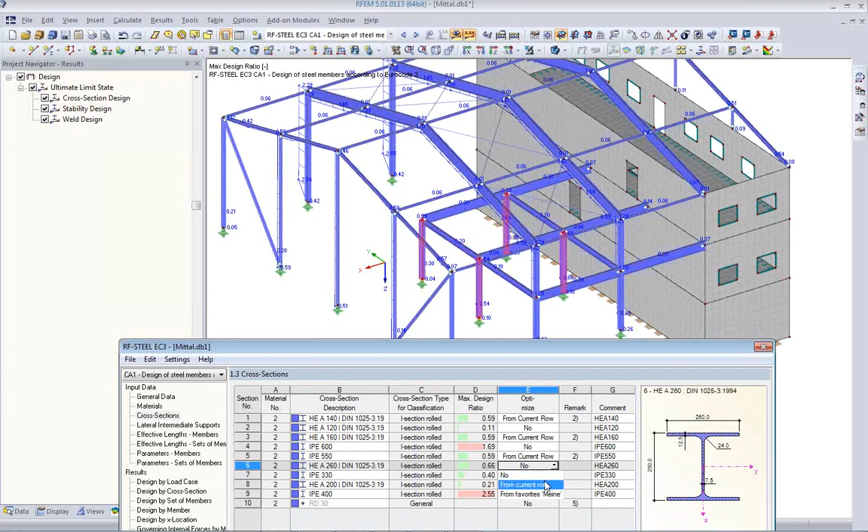Then we have here the columns here, which I need to change, but anyway, I'd like to set them up for optimization. I also want to optimize those. And my main columns I want to optimize as well.

I run the analysis, maybe now only in the steel check. So I rerun the analysis here, calculation, and see what I end up with, with the internal forces that I have now.

So it picks a HEA 120 for the corner, 140 here, which sounds reasonable. 500 is okay. We have 240. Okay, let's stick with it. 240 instead of 330 here, and this is 600, so there's nothing to be done.

But now the blue cross sections are optimized, and I can export them now to RFEM to update my internal forces. I do this now because I have a better idea already from these cross sections. Okay, 6 are updated now from the initial design, and now I'm doing my model changes additionally.

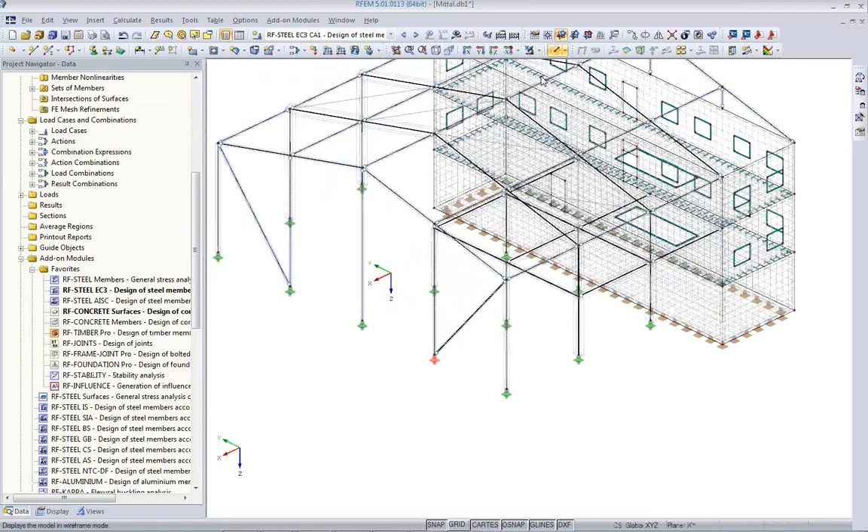That means I want to have a column here. I pick the type of column from an existing beam, so I have the orientation and the cross section correctly. Say okay, from here to here, and the same thing from here to here. Also, I'd like to have this little column here of the same type. I copy it, make one copy from here to here. Okay. So everything seems to be reasonable.

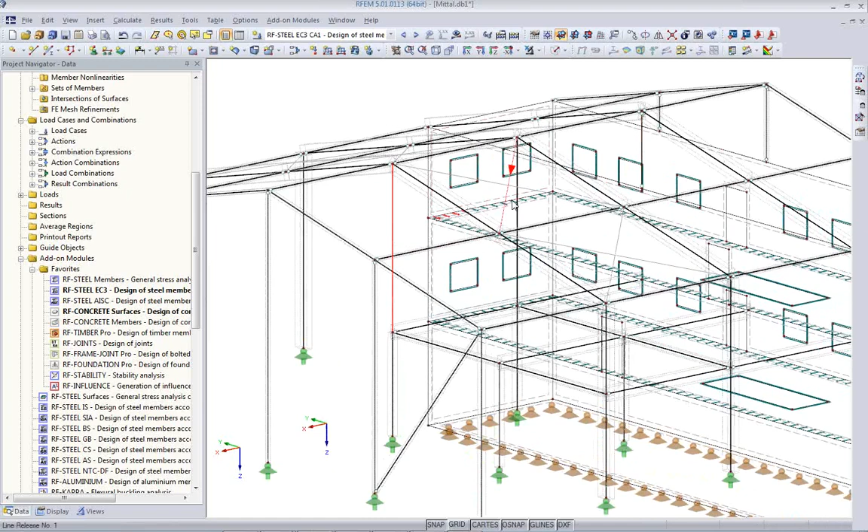Now here on the top, I want to have an additional member release, so I have an easy connection up here. At the other end, I cannot forget to rotate my columns here by 90 degrees, so they are carrying the moment in the right direction. Voila. With this, I go back and run my analysis of Steel EC3. I just click, please show me results of Steel EC3, and RFEM will automatically update the results.

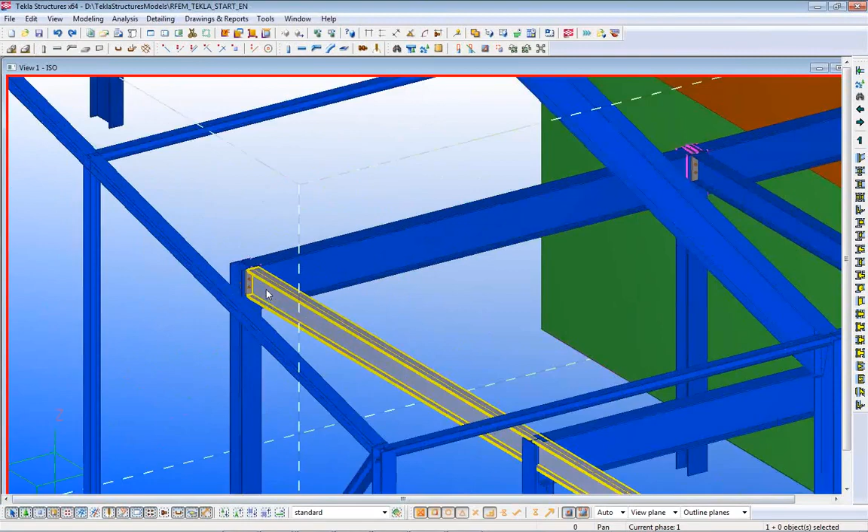So this takes another few seconds, which allows me to explain something more in the Tekla model. In the Tekla model, I also have connections already. So the connections may be done now while the structural engineer works on the design. And the connections are here. It's a very powerful feature of Tekla Structures.

You see here connections are there. We see here also that these parts are one part, one beam. This is one beam. These columns are one part. So it is a different model. The analytical model is a different model than the structural model. Let's see what RFEM does. So we have a nonlinear analysis here.

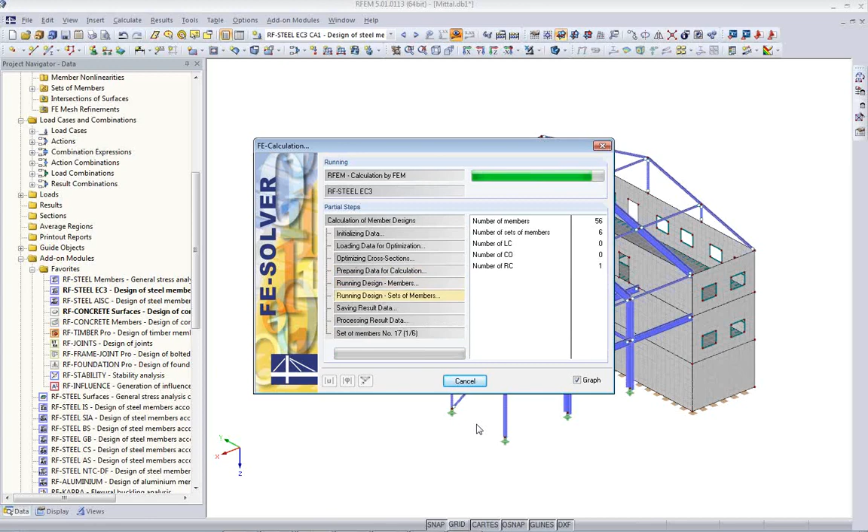And okay, I think I'm running into a slight problem here, which I need to close and see what happens. Okay. We have combination 11 now that is analyzed, and then we should get some result. Okay. Now we get into the analysis of Steel EC3, and we have a design ratio of 95%.

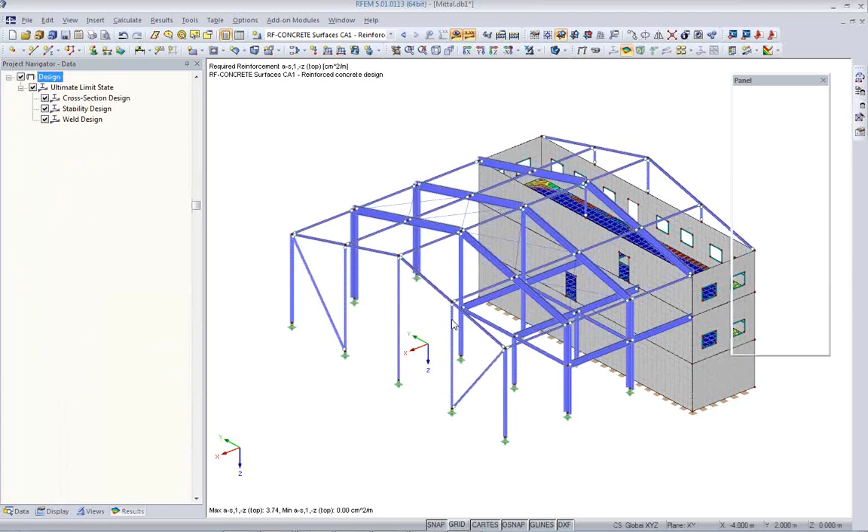Let's have a brief look at the concrete results and do the concrete analysis. And we get here, I can use my view again, floors. Okay, but I need the results here, concrete. We see here top reinforcement in one direction, in the other direction. We see here bottom reinforcement in two directions.

This is the required reinforcement, and we can show the additional required reinforcement. So I have a basic reinforcement, and everything which is above this is now shown in different colors. So basically you put your wire fabric in here, and you put in the additional reinforcement where we have the colored parts. Okay, my design is so far done. I'll keep my results here. Result combination 1. And we can now update the Tekla model.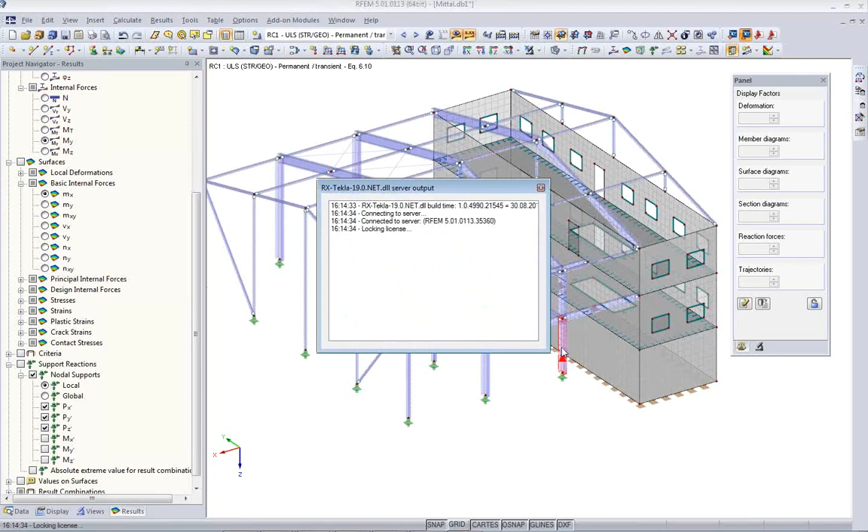So I go to Tekla Structures. The model is here. I've pointed out the connections. We go to RFEM and we say update existing model. So we update the existing model. We also export the internal forces, and we click OK, and then we go to Tekla Structures and see what happens. After a certain time, we get the updated model.

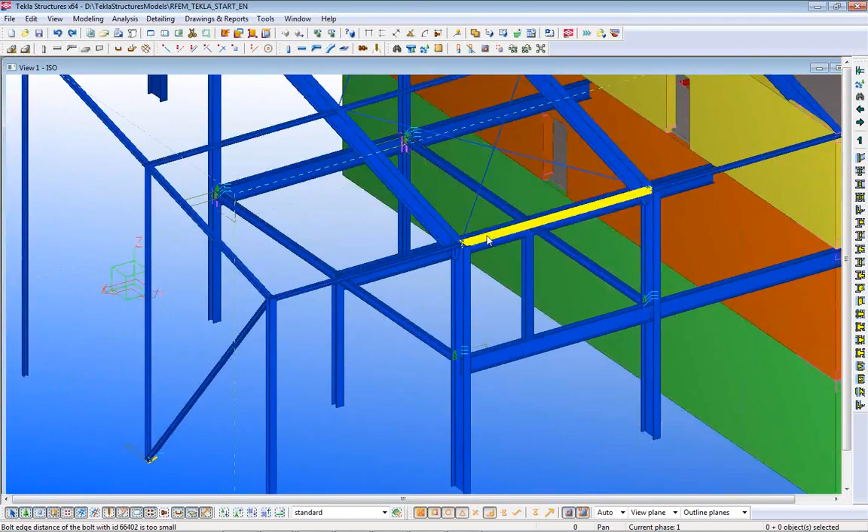We see here now we have the bracings. We see here now we have the changed cross sections. We have here also the updated internal forces. Now I can do undo, and you see the changes. We have the columns here, redo, and see how the connections follow the changed situation. So also we should have the opening here.

And yeah, we can also check if we have internal forces. We see here also this part of the structure is still one part. It's not two parts like in the analytical model. I can right click on it, inquire part, and we see here information from the Dlubal software. We see here the internal forces, bending moment, 188, shear, axial force.

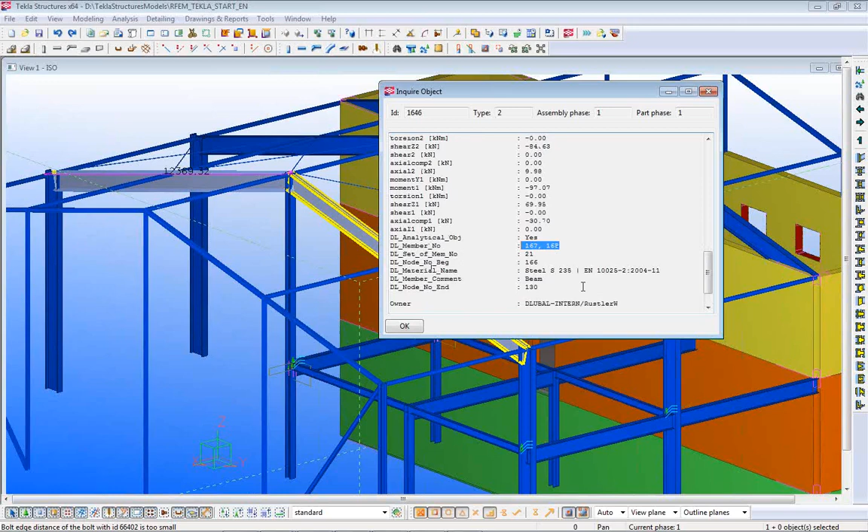We see here also the member number in the Dlubal software, material, and we can reference to those objects as well. So let's see whether we find it. 167. I go here, member number 167. Yeah, I can select it. I can say, please show me only the selection.

Excuse me, show me only the selection. And I want to have the results here of the internal forces, 188.5, and this should be the value here, 188.5, moment M2. So now we can use this for information in a connection design, for example.

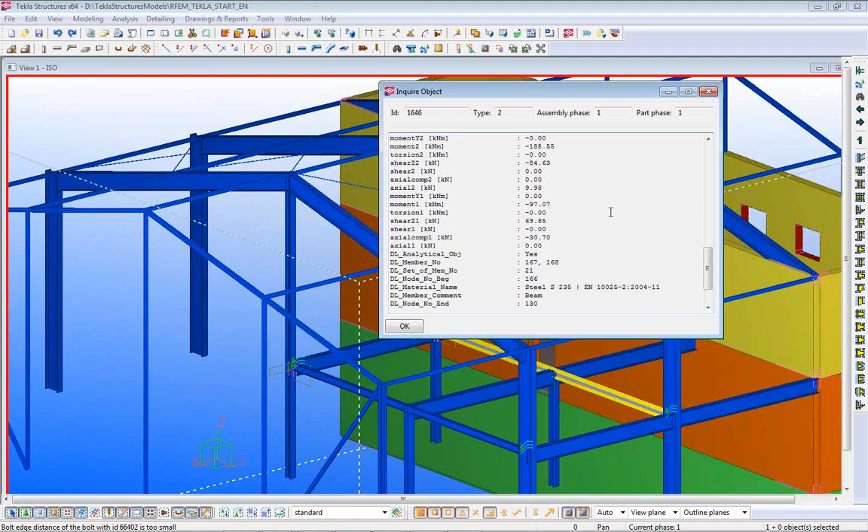Okay, this is also important to know that all the beams, for example, still are top of steel. All the work that has been done by the detailer is still not lost. It's updated, and we get here the changed situations of cross sections, surfaces, openings, and so on.

This is what I wanted to show you live today inside our software and in Tekla Structures. I hope you could learn something from it and everything was interesting for you.

Let me go back to the PowerPoint presentation, and I'd like to point out a few more things for you before we separate today. I think Robert answered quite a few of questions. Maybe I should take a look at those before we do the information with the other software.

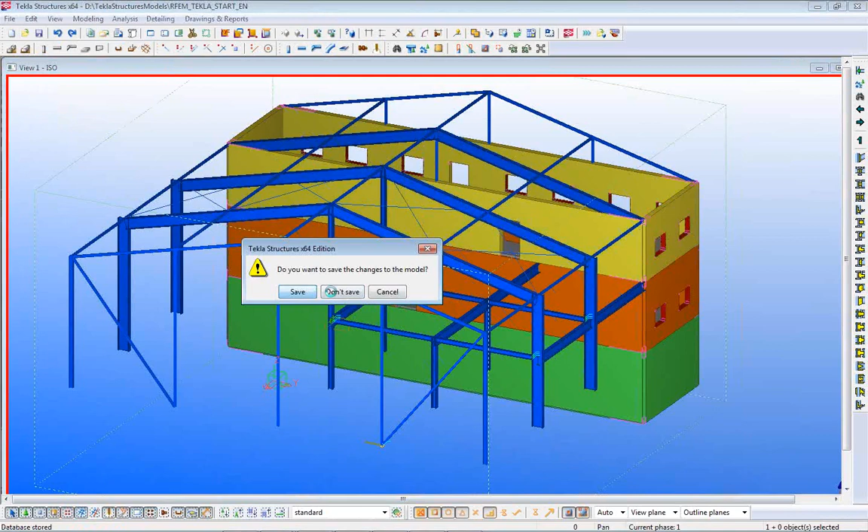There was one question whether we can handle general sections or non-standard sections. I have shown you the mapping file. Maybe I need to explain this in a new structure. Hang on, I open a new model. I save it maybe better. Sections, no, not, okay, we can use that as well. This is a typical question, and it's not surprising that it comes up here as well.

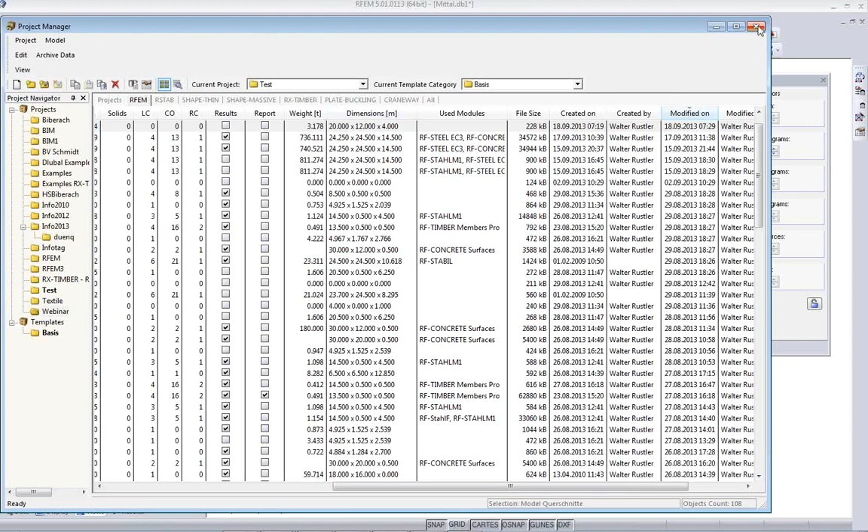Here, for example, I have a few non-standard sections. For example, something like a C section, or these are sections with variable depth, parametric sections, and I can also do things like in RFEM. I have also a typical model for it. I can go here in the project manager. Hang on, open it new.

And we go here and find sorting models. Just a second. Sections. Maybe now. Okay, where is my model? Okay, never mind. Let's use just a Tekla model. We can do it that way too. I create a new file. Okay.

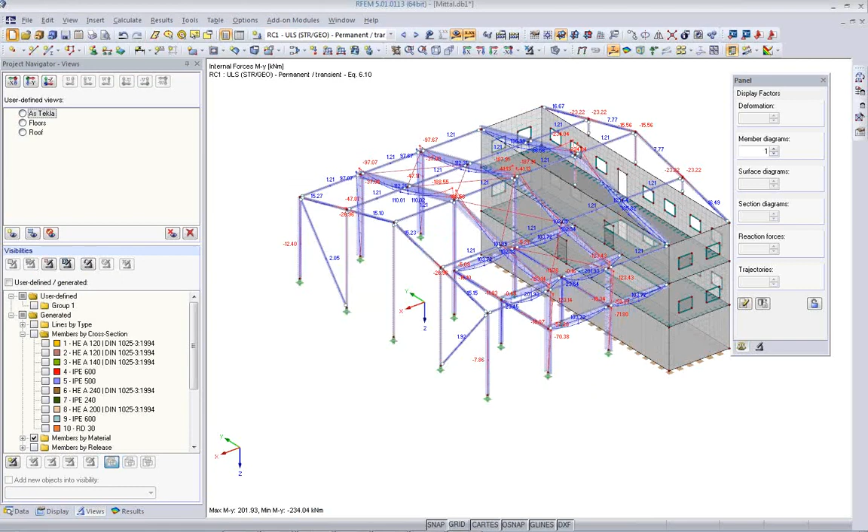And I import this non-standard section from Tekla, it doesn't matter, we can go this direction, into this file, import, okay, analytical model, okay. And here I have my new cross-sections. For example, there is this C shape, and there is also a boxed shape, which is called in Dlubal, for example, like this. But in Tekla, it's called differently. It's called WB 500 and so on.

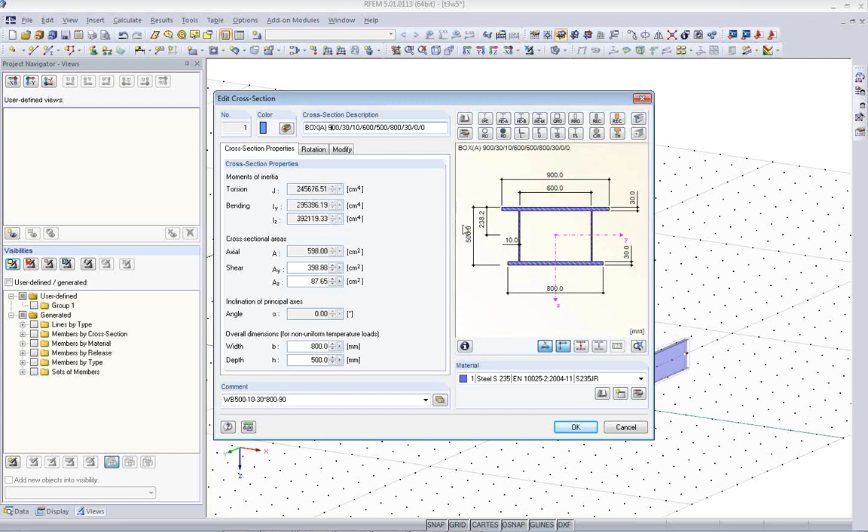But we internally mapped those cross sections, and I can change it now here. For example, I go into the material library and I change it here to, let's say, 900. And maybe this should be 1000. So it's wider. Okay. Where I can change also the depth of this welded section, where I go in the library.

It's better to maybe do this in the tables. Hang on, you can see it better. Cross sections. Yeah, and I change it here to maybe 1200. Width should be 200, and so on. I right away have all my cross section data here.

Okay. And this changed information I send to Tekla now, and I update the structure. Update existing model. Okay. And I look into Tekla, and everything is updated now. I have here 1200, and I have here this parametric section is also updated.

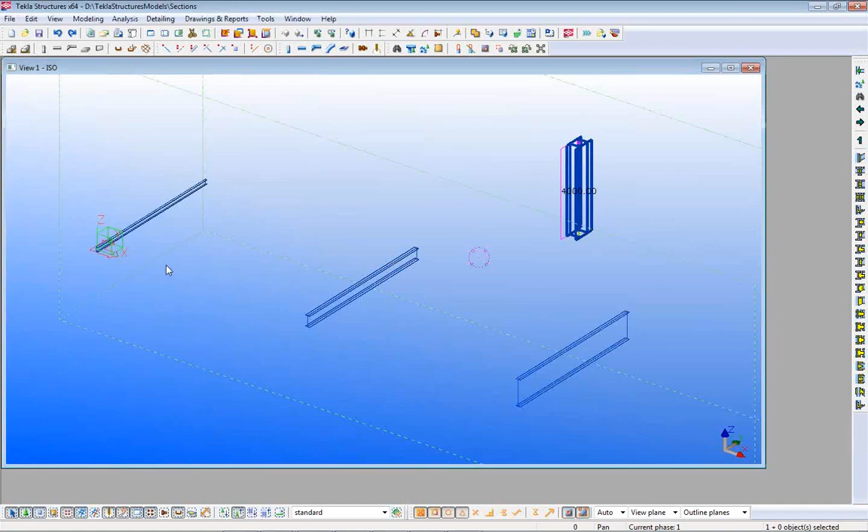One more word to this C section here. In the import detailed settings that I showed you at the beginning, you can see here the mapping file for materials, but also for cross sections. And here I have this cross section here. So in Dlubal, this section is called KC200 by 2.5, provided by Starbar, and I map it this way.

So in this way I can map any cross section I like, and you can very comfortably work with this import export to Excel options to create such mapping files. Standard cross sections are mapped by default with the software, and others can be handled with the mapping file.

Question was if we can import and export IFC files. I can show you this as well. IFC is supported here. Import Industry Foundation Classes, IFC. We support the structural analysis view and the IFC coordination view. It is important to know the difference.

The analytical view includes representation of nodes at beginning and end, and supports and releases and loads, while the architectural view, which is mainly used also by Tekla and by other BIM software, includes basically a 3D representation, or solid representation, of all the parts and objects.

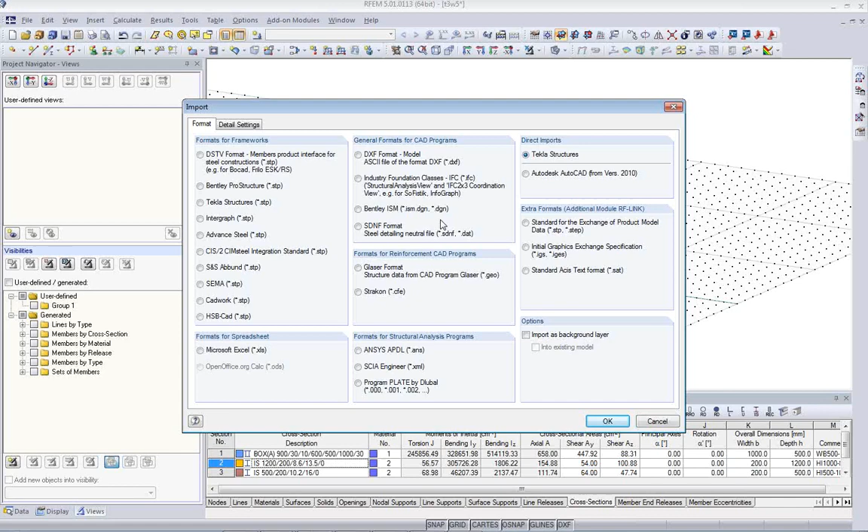Can I use springs as a release in Tekla? As I said, in Tekla, you need to have an analytical model. You can set up releases here and also spring constants. They can be, for example, a spring. And if you have this spring constant, then we also import this spring constant inside our analytical model.

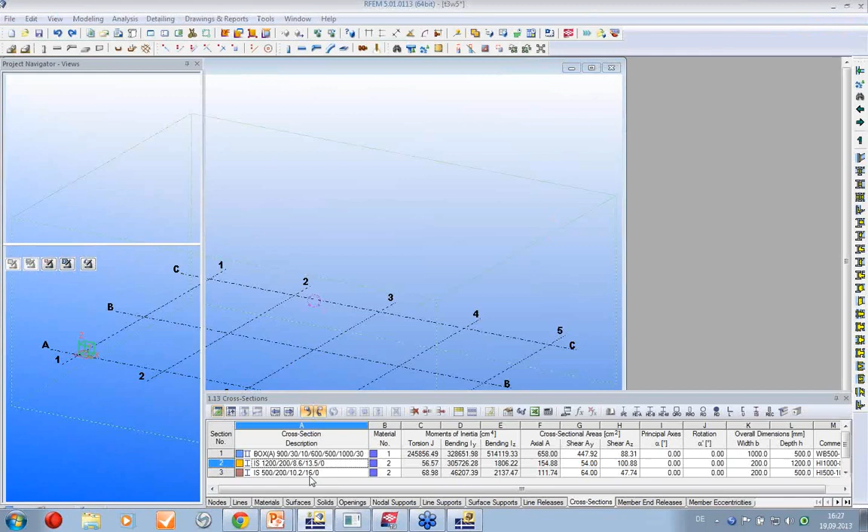Then there was the question, again, can I export a model from Dlubal to Tekla? Yes, we always write the physical model, so we're not writing the analytical bar model, but we write the physical model. Maybe I can create a new model or open an existing empty model here that I can use to export something into it. Let's see what I have here. We can, for example, use something like this.

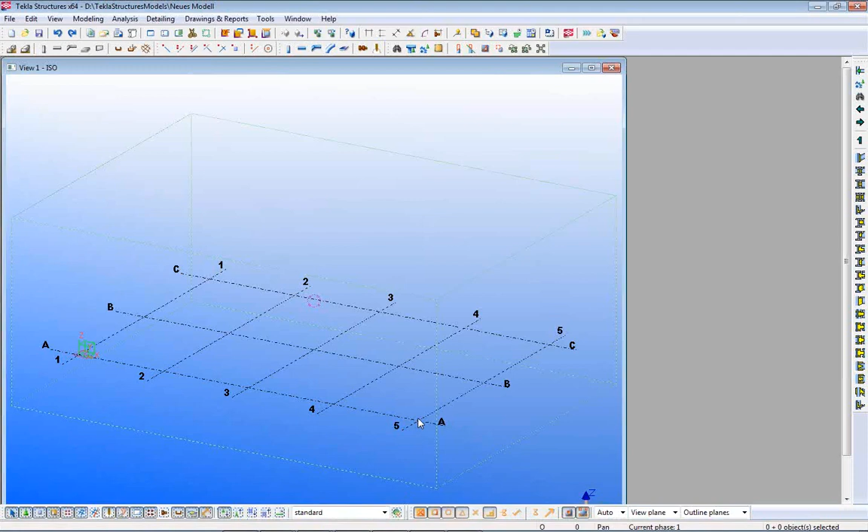This is a real project from a customer of ours who did some analysis of a multi-story building, and we can export this to Tekla Structures, export, update existing or override in this case. Okay, we have no results, so after a while we should see the model showing up here. It's built up here, and we have here the 3D model, and Tekla users can use it and work with it as well.

Okay, I think Robert answered most of all the other questions, and also I think we have spent a lot of time. Usually I plan to be here for a little bit over an hour. It's 1.5 hours. So let me point out a few more sources of information.